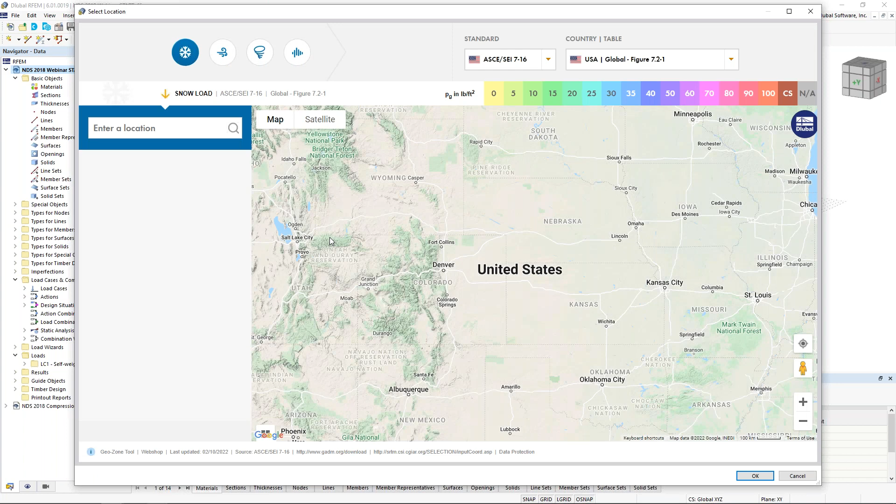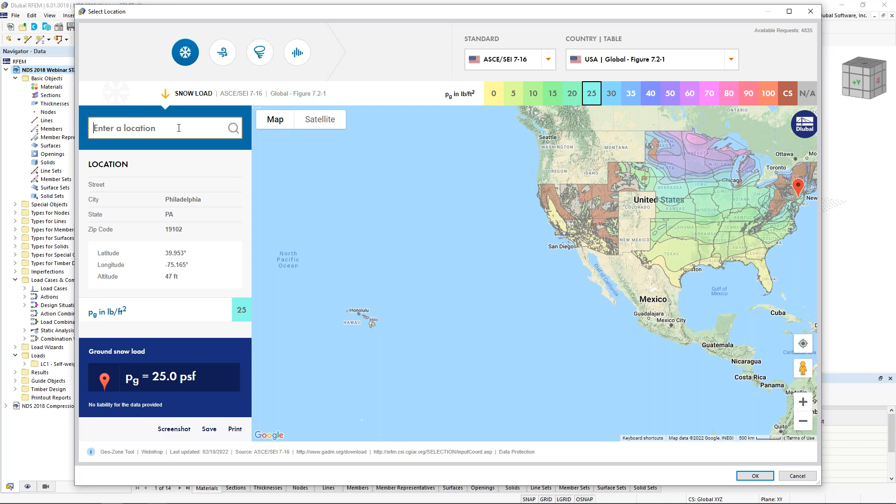Finally, under the model parameters, you can see that this links directly to our online GeoZone tool. And this GeoZone tool is available on our website where we have integrated the maps from the ASCE 7 for snow, wind, tornado, and seismic. This is linked with Google Maps technology, so we just need to type in our project location, for example, Philadelphia, and we can see the ground snow load is automatically populated here directly from the standard. When I click OK, all of this information is automatically going to be imported into the model that will be used for those load wizards a little bit later on.

So once we are done defining the base data, we will be brought into the main program, and we can see our drawing grid activated here. Well, we can modify those drawing grid settings by right-clicking at grid down at the bottom. My default spacing here is set at 1 foot. If we see anything other than this, for example, when you first start the model, you might see something like around 3 feet, you can always hit this default option here to go back to the 1 foot or adjust this to maybe 0.5 feet. We can also open up our units here and change this to inches if we're working on a much smaller scale.

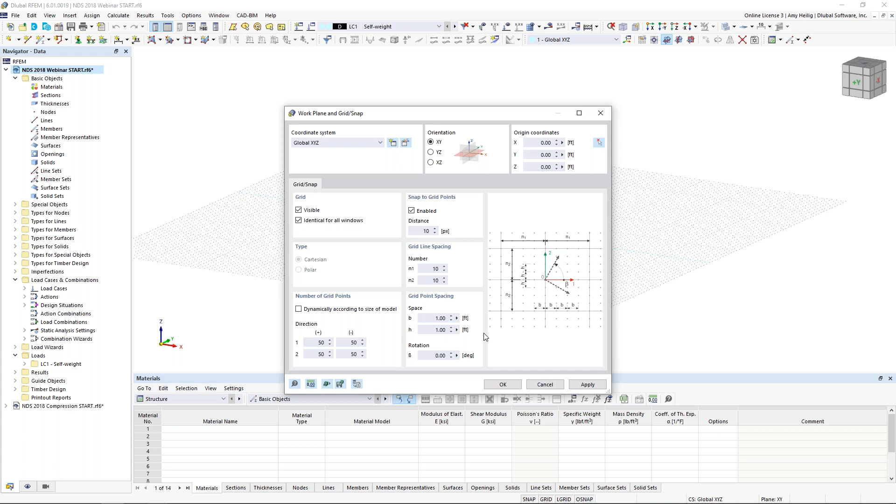So there are many different ways to model within the program. We could begin by drawing our first member and defining the cross sections and materials as we go. But an alternative option I'm going to take is to define all of my cross sections and materials at the beginning. So over in the navigator, I can right click on my sections and I can create a new section here.

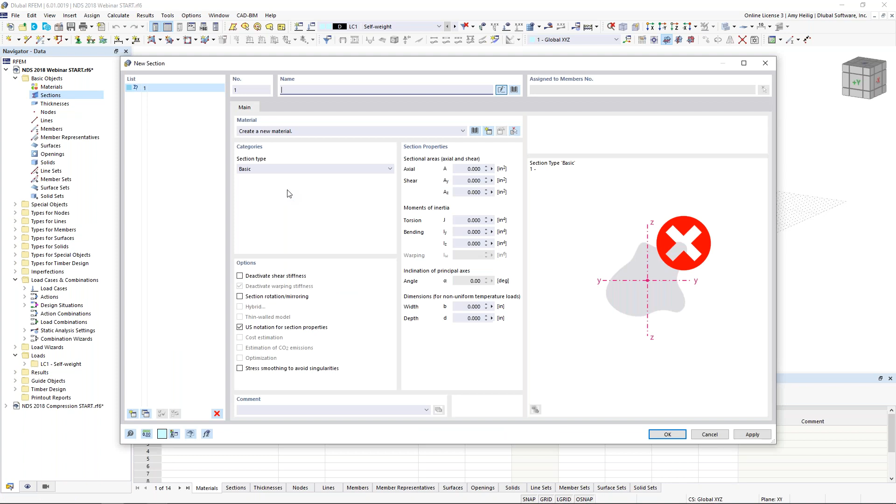I want to access my section library, and we have our standardized sections over on the left, which does include timber. So when we launch this, we can use our filters over on the left to filter the NDS 2018, and we see the various dimensional sections available to us, including glulam, for example, and we can see all of the available sizes.

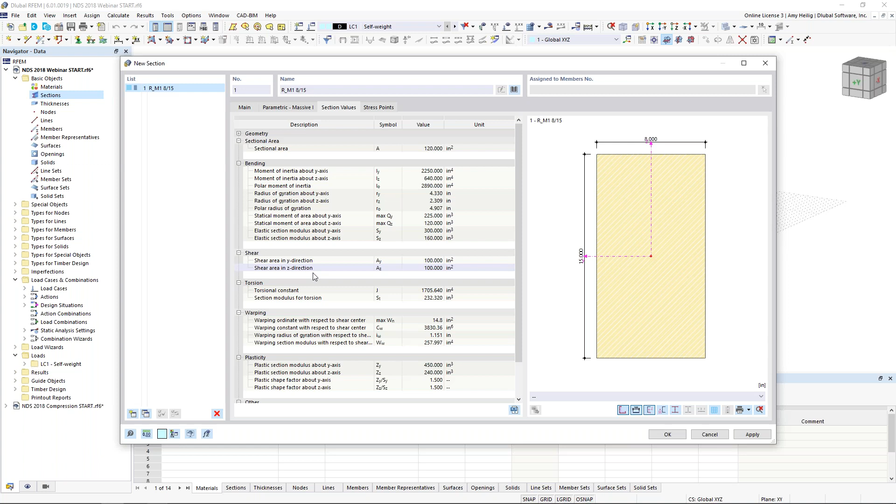Now, the alternative option is to go back into the library here and choose one of our parametric massive sections. So for example, we can just choose a rectangle. This allows me to input the dimensions directly, and we'll choose 8 inches in width and 15 inches in depth. The cross-section properties will be automatically calculated here. And back under that first tab is where we need to set our material for this cross-section.

So we'll visit our material database now, and we can use our filters over on the left here to filter to timber. We can filter to the NDS 2018, and sure enough, we have every single material available here from the NDS standard. Now we can take it a step further, and perhaps we want to filter to table 5A for our glulam materials. And I'm going to select 24F 1.7E. Over on the right-hand side, we can see the different options, and we'll choose Southern Pine.

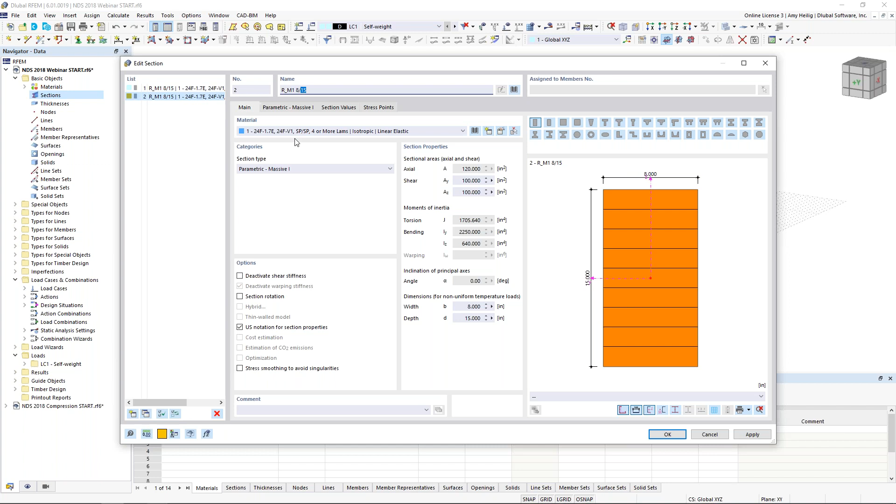I click OK, and now that material is available to me for all future sections that I will model in the program. I can simply make a copy of this existing cross-section, and rather than going into my library, I can simply type in the exact dimension here, 26. So we'll notice that this cross-section updates accordingly. Same material will be used. We want to create one more cross-section here.

This time, instead of a rectangle, we'll choose a parametric square section. Under the massive tab here, I will go ahead and adjust the dimensions to 6 inches. Under the main tab, I don't want to set glulam, but rather I'm going to go back into my material library and choose table 4D. Now we can see all of the available materials to us, which is still a little overwhelming, so we can take advantage of the search options down at the bottom.

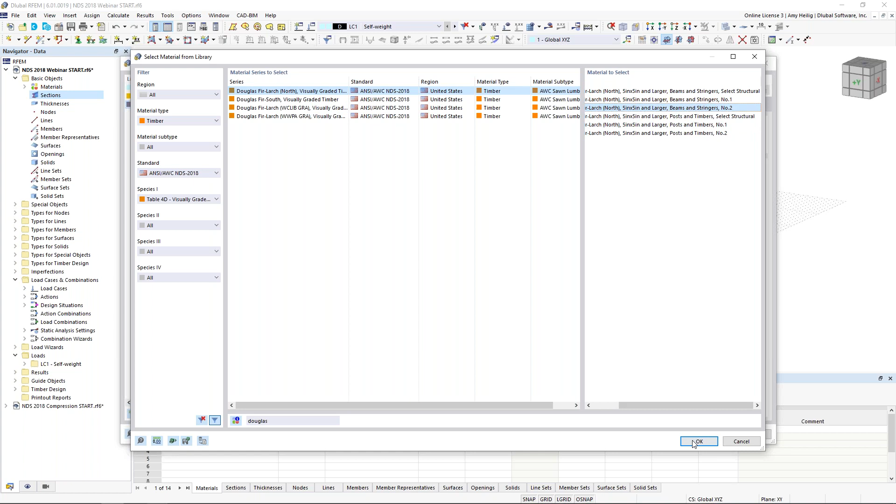So for example, if I begin to type Douglas, notice that all of the materials with Douglas within the name are now filtered. So I can choose Douglas Fir-Larch North, and then I can scroll over to select number 2. I click OK, so now we have that solid section given to us here. Once I click OK, what I'll notice is that my materials and cross sections are now available within my navigator here.

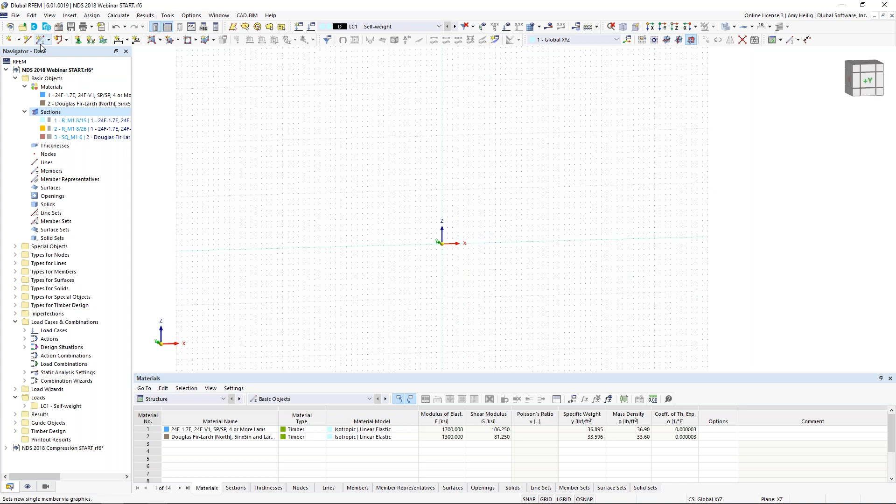So I want to begin by drawing my first member. I will adjust my drawing grid into the vertical XZ plane, and I will go up to my tool to draw a new single member. The member type is going to be beam. The design properties are activated here, and this is specific to the timber design add-on and relative to these additional tabs up at the top. So we'll leave this enabled, but I'm not going to get into the details right now specific for the design properties.

We'll go to the section tab here, and the distribution type is going to be set to linear. So this allows me to define a tapered glulam section. Now, new within RFEM 6 is that previously we only allowed you to define a tapered section that looked exactly like this, where the center line just runs right down the center. But we have added within RFEM 6 the ability to adjust the alignment. So now we can see that the taper only occurs at the bottom section of the member.

The member start will be that 8 by 15 section, but the member end will be the 8 by 26 that we've already defined. The material is automatically set here, so this is all we need to do to define our first member.

We click OK, and I can snap from the point 0, 0, 0 up to a point 15 feet in the vertical direction, and we have our first tapered member. Now, in a similar fashion, I can snap to a point here 23 feet in the X direction up to the top of the column.

If I right click to exit out of that dialog box, I see here that I would like to add in some type of pitch for my roof, and I'd like this pitch to be 14 degrees.

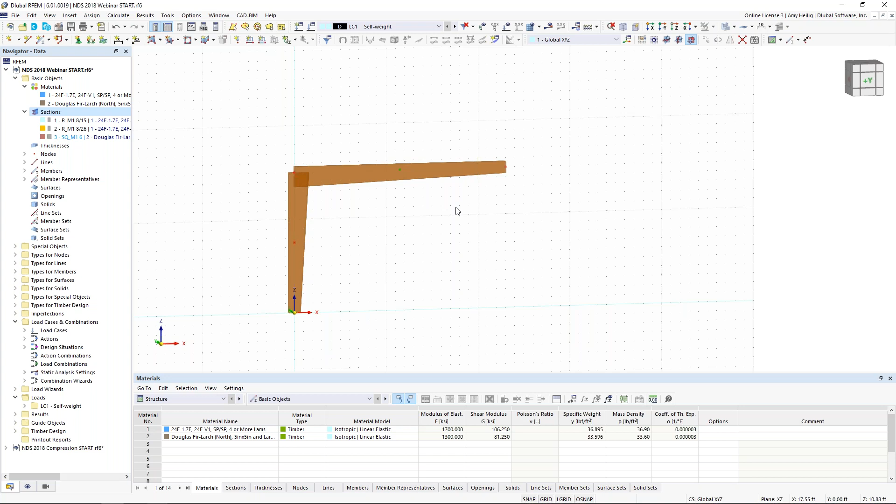So rather than manually having to figure out the geometry, we can select this member, and under the edit options, I can go down to chamfer. And I can input in an angle of -14 degrees. I would like to rotate about the global y-axis in the vertical z direction.

And then I need to graphically select my base point here. I click OK, and so now we'll have that 14-degree incline.

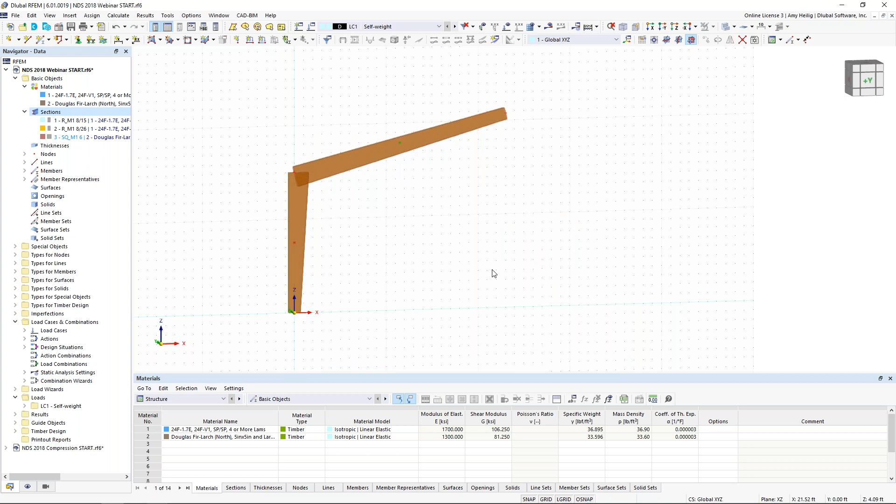I select both of these members, and I'm going to utilize my mirror tool. This is exactly like what we would see in something like AutoCAD, where I can create a copy. I would like to mirror about the ZY plane, and I'm going to choose my mirroring point right here at the apex. I click OK, and we should see our first frame generated.

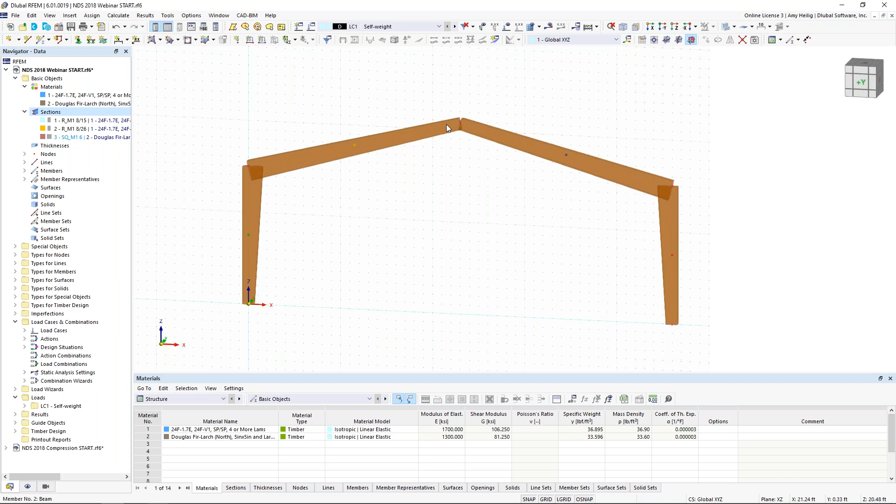Now, I want to add a member hinge at the top here only for my beam on the left. I can do so by double clicking on the member. Now, by default, everything is considered fully fixed, so in order to add in that member hinge, I can activate the hinges here.

And now we get a new tab, and at the member start, I can define my member hinge. You can see that the program automatically suggests I probably want to release the moment about the local Y and local Z axes. That's correct.

I click OK. So now that member hinge definition is available to me for any future members within this model. I don't need to keep redefining, I can simply select it from this drop-down box. I can click OK, and now we should see that member hinge applied to that beam on the left.

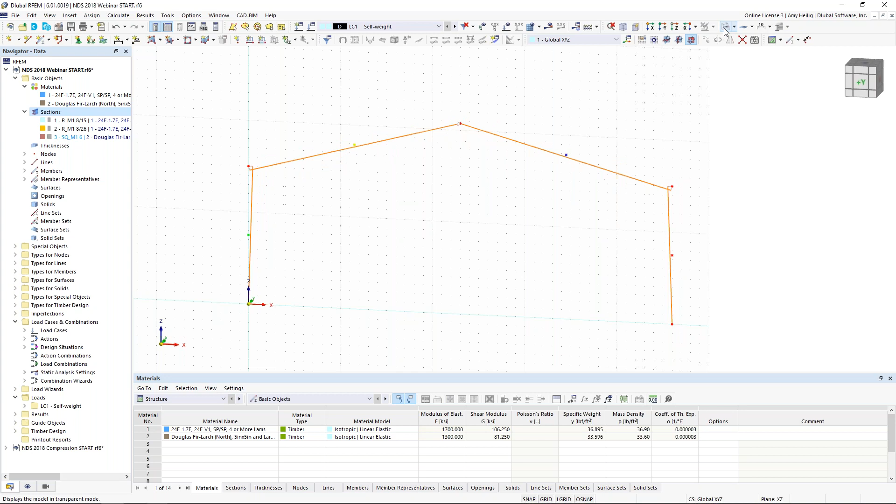So I'll turn this into wireframe view, and I'm going to turn off my member representatives in order to make this a little bit more clear for you. I'm going to hold down my control key to select both of these top members.

And I'm going to right click, and under members, I am going to divide the member by a set number of intermediate nodes. So I want to add 2 nodes along the member length here, but it's really important that I also check this option down at the bottom to create the on-member nodes without actually dividing the member. We want to keep these as one continuous segment and just rather have these nodes added along the length.

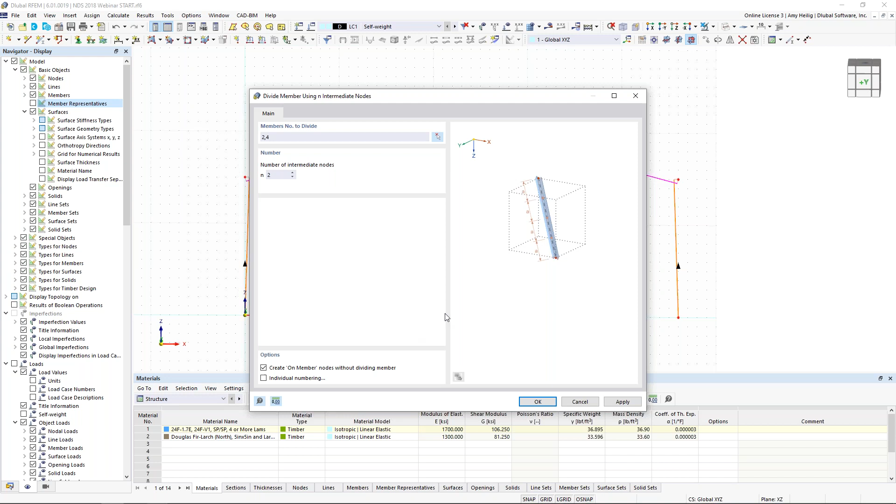So when I click OK, you'll notice that these nodes are added. They're a different color than my standard nodes. If I double click on it, the reason why is because it has this special setting here. The node type is set to on member rather than standard.

So now any other member that frames into this original member, maybe we add in some nodes at these, or add in some loads at these specific nodal points, will all be detected along the member length.

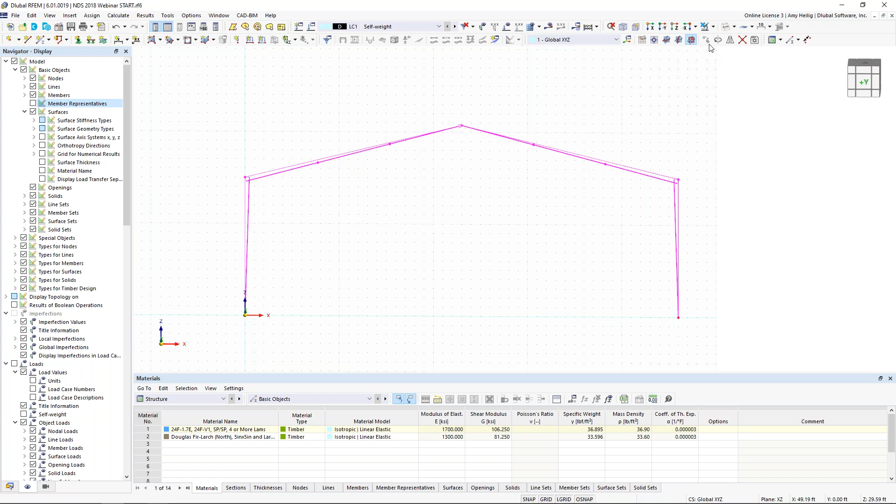I'm going to take my selection box and drag from right to left. And notice I am not going to select the nodes at the bottom of the structure, and there is a reason for this. We will select all of these options except for those nodes and utilize our Move Copy tool.

Move Copy tool allows me to create a copy, and I'll create 4 copies in the Y direction of 16 feet. But under my second tab, I have this option to activate these step links.

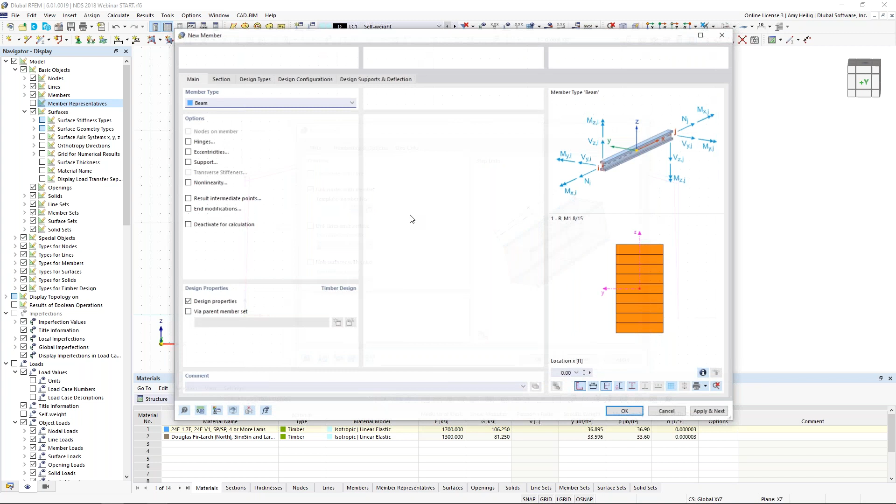So when I activate this, I get a new tab, and the program allows me to create new members between my copied nodes. So I can create a new template, and this should look like a familiar dialog box. It's as though we're drawing a new member. The member type is going to be set to truss.

So truss is a little different, and you'll notice that the hinges is now grayed out. That's because internally we're going to assume that we have a moment release at the member start and the member end. So rather than having to manually define that, we can select truss, and that's automatically applied.

Now for my cross section, I want to use my drop-down box here to select that 6x6 solid Douglas fir-larch section. I click OK. Remember, I'm still within the Move Copy dialog box. I click OK. And again, the advantage is that the program has automatically generated those members between those copied nodes.

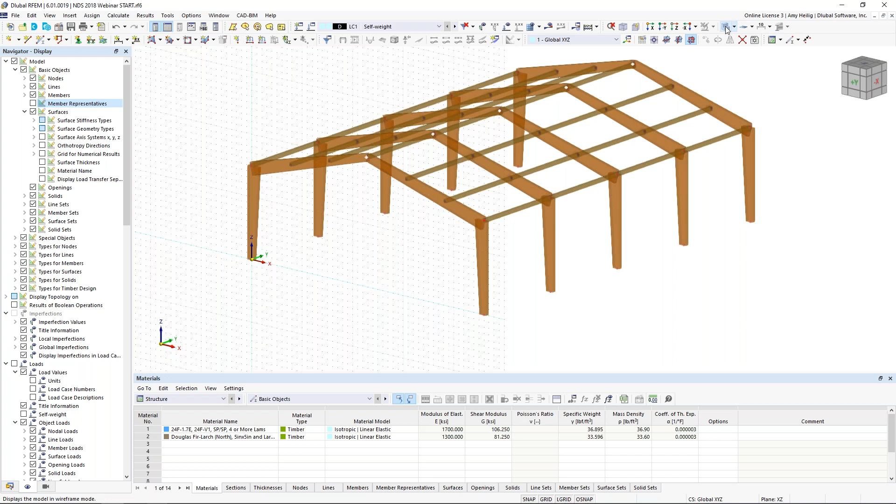Okay, so what we would like to do now is to add some columns at the front and rear of our structure. What I'll do is turn this back to wireframe view, and I'm going to adjust my drawing grid origin with this button up here in my toolbar.

And I want to snap that directly to this point along my member length. So we can see when we rotate this around, the drawing grid's still at the front of the structure, but I've just modified the location.

We're going to draw a new member. The member type is beam. I do want to activate the hinges here. At the section tab, I will leave this as the 8x15 section, but not tapered, just one continuous section throughout the length.

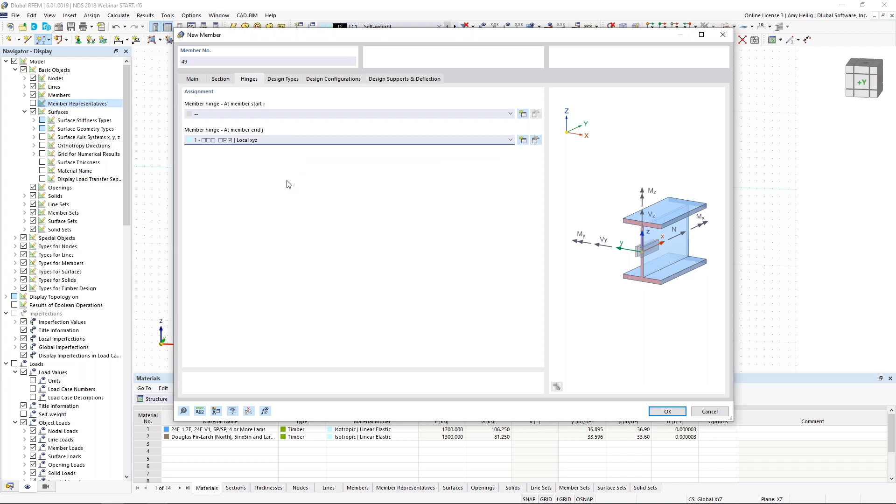For the hinges, I would like the member hinge to be applied to the member end. Remember, I've already defined that member hinge. I can select it from my drop-down box. I click OK, and I'm just going to snap here from a point at the bottom of my structure up to the top, the intersecting node.

Now, this node needs to be slightly adjusted at the bottom. Rather than sitting at negative 0.33, I want it to sit at 0 elevation. I just adjust that, I hit enter, and now that column is exactly where it should be.

I can highlight this element, hold down my control key, and utilize the drag and drop feature to make a copy here on the right side of the structure.

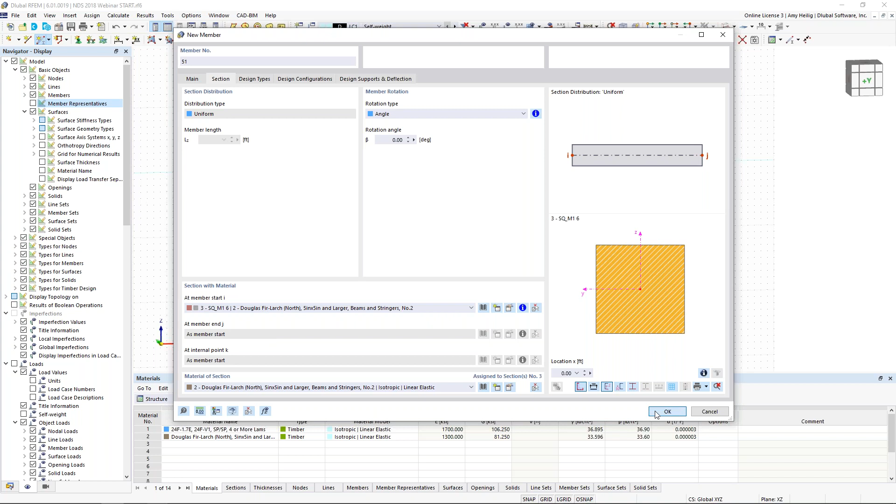I would like to add in some additional lateral bracing here in the global X direction. So we go to draw a new member. Once again, the member type will be set to truss. The section is going to be that 6x6 solid section here. Remember, I don't need to apply any hinges because internally the truss option is taking care of that. And I'm just going to snap from the bottom of my column elements up here to the top.

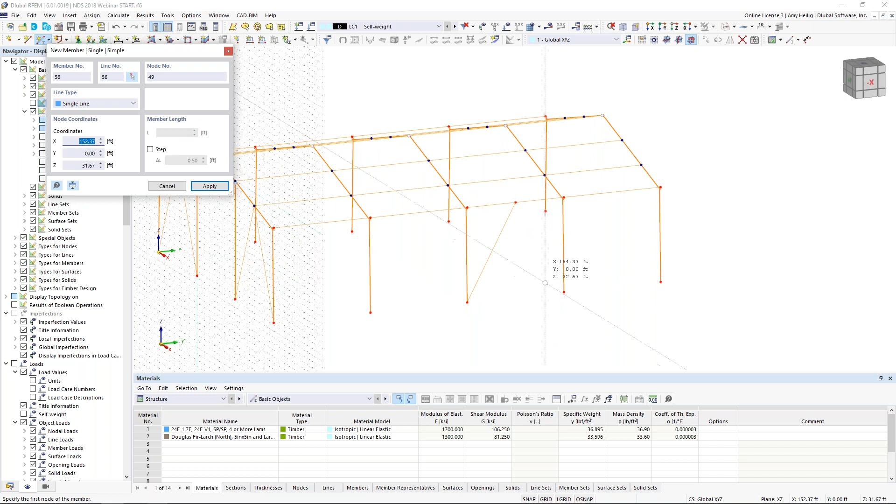I can rotate this around. Notice the program automatically snaps to these nodal points. While I'm still within this dialog box, I want to add in additional lateral bracing here in the global Y direction. So I will snap from the bottom of the column. Notice the program detects the midpoint here of that truss segment.

And I'll do so up here on the roof by just selecting my start and end node points. And we'll do it one more time here. I right-click to exit out of this dialog box, zoom in just to make sure everything's connected, everything looks fine.

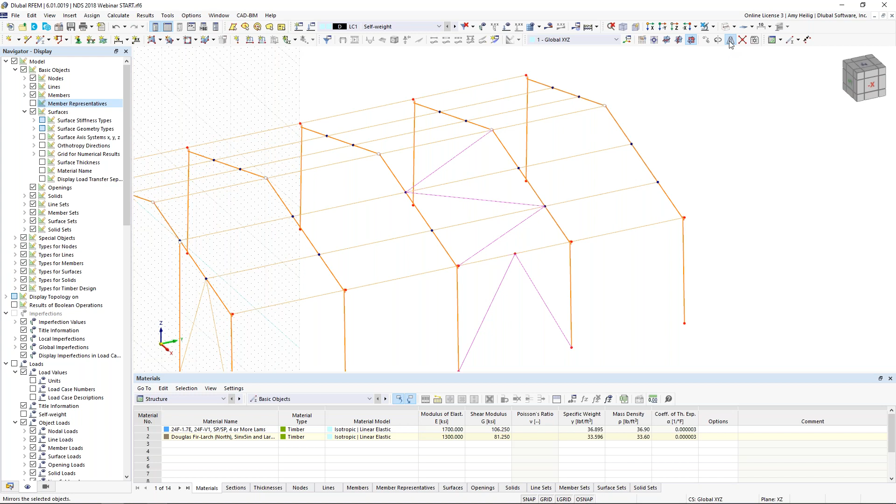Now I'm going to hold down my control key to select these additional brace elements that I just created. We'll utilize our mirror tool once again to create a copy about the YZ plane, and I'm going to select my mirroring point at the top here of my structure. I click OK, and now we have the bracing on the other side.

I would like to take these elements at the front of the structure. I will use my selection box to highlight them all. I hold down my control key, I drag and drop to make a copy at the rear of the structure. So now those column elements and braces are shown at the rear of the structure with that simple tool.

Okay, the member modeling is now complete. What I would like to do is to support the structure with a new nodal support, and we can find that up here in our toolbar, assign new nodal support.

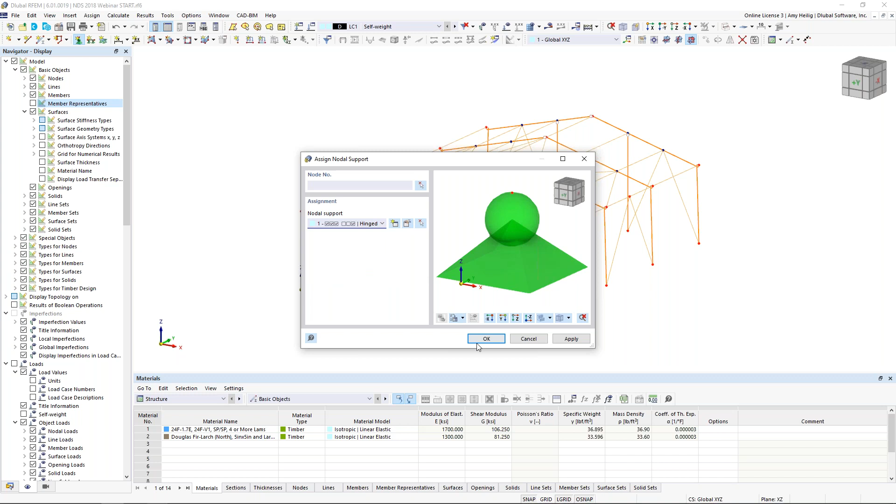Now we have some default options here within the dropdown, including a typical hinged, we have fixed, or we have a few roller options. Of course, you can always create your own nodal support option with the 6 degrees of freedom. Non-linearities are available in there as well, but for today, we're just going to choose the default hinged. I click OK, and this will allow me to highlight over all the nodes at the bottom of my structure.

If I right-click to exit out of that dialog box and right-click on any one of these nodal supports, I can use my slider option to increase or decrease the size. So that's also new within RFEM 6.

So our member modeling is complete. We've added the supports. I'd like to move on to loading now, but there's one thing I want to take care of related to modeling that does affect our loading.

This will be a structure with some type of roof membrane, but I don't want to actually draw in the roof surface with a material and thickness. Rather, I'm going to take advantage of a new feature within the program for load transfer only. I'm going to draw a new surface, and the surface is not going to affect the stiffness. It does not add any rigidity to the structure. We're not applying a material. We're purely using it for load transfer to our members.

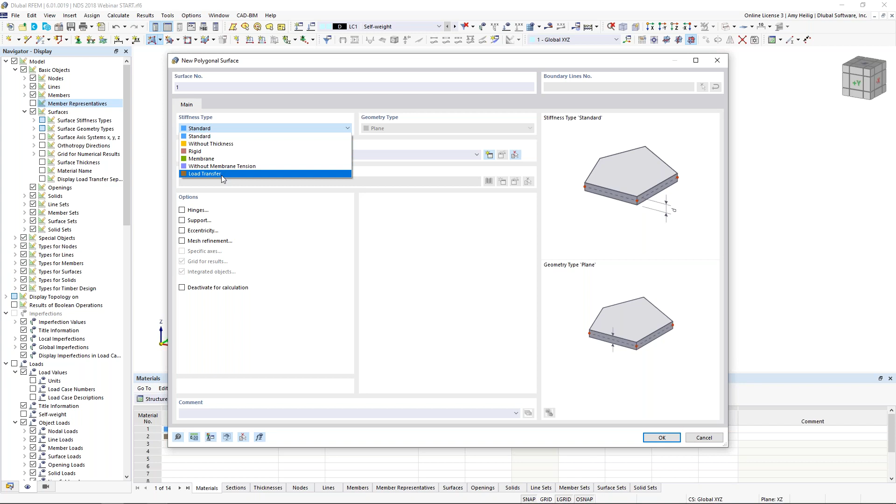Within our toolbar, we can draw a new surface, and I'll choose the option polygon. Rather than the stiffness type set to standard, where I would define a material and thickness, we're going to use our dropdown to select this new option, load transfer. Everything is grayed out here. Again, we're not adding stiffness, but rather we go to this second tab and tell the program in which direction we want to transfer the load.

Based on one-way load distribution of the x-axis—these are local x-axes of the surfaces, local y-axes—or do I want two-way load distribution in both directions? We'll go ahead and stick with only the x direction.

When I click OK, this allows me to snap to my different points to draw in this load transfer surface on the left side. We can see that dotted line shown in wireframe view. We'll do so on the right-hand side, and we'll close this loop by selecting our original point, and here are those two surfaces generated.

I can right-click to show the local axis system of those surfaces, and we can make sure the local x-axis direction for the load distribution is in the correct orientation. I'll turn back off the local axes. We can even turn this into rendered view if we'd like to see those surfaces in a bit more detail.

Now that these surfaces are drawn, our modeling is complete and we can truly move on to the loading.

In order to apply the loading to the structure, we need to set up our load cases. I'll go up to my toolbar to select Edit Active Load Case. The program by default creates my first load case, called self-weight. I can rename this to dead load. Notice the self-weight is active here. The action categories are based on ASCE 7; we have selected dead load from this dropdown.

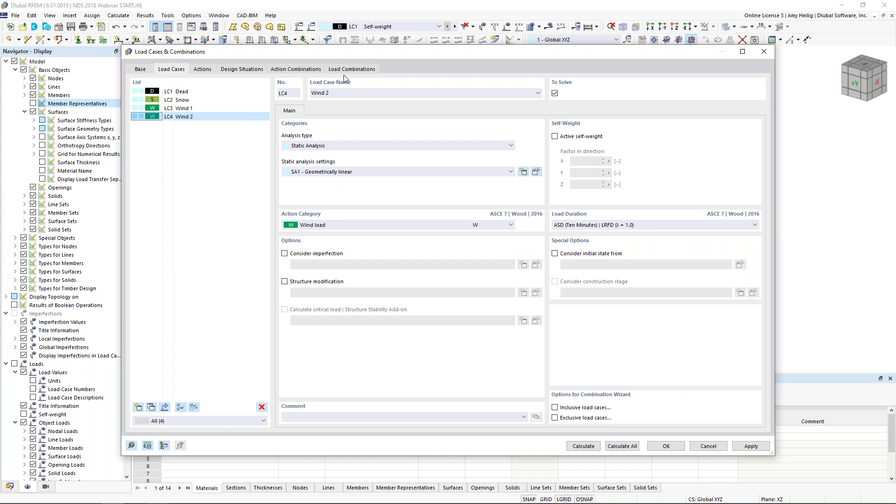I'm going to create a second load case called snow load with the action category of snow. Self-weight is unchecked here—we don't want to account for it twice. I'm going to create a third load case, wind 1, with the action category of wind load. I can even make a copy of this existing wind load case and rename it to wind load 2. Now I'll get back into this dialog box to explain further about design situations and load combinations, but for now I just wanted to set up these load cases.

Now that those are set up, I can apply the loads to the structure in the relevant load case. We'll begin with dead load. The advantage of these new surface load transfer options is that I can apply a surface load to this structure, which is much more efficient than applying individual member loads to each of my frames. I'll go up here to draw a new surface load. The load magnitude is set at negative 0.01 kips per square foot. I can graphically select surface number 1 and surface number 2. I click OK, and here are my loads shown graphically on the structure.

Under the display settings in my navigator, we'll see at the very top our surfaces tree. When I expand the surfaces, we have this setting to display the load transfer separately.

So I can activate this, and now we can see the loads applied to each member based on the tributary area. So just a bit of a time saver here by utilizing these surface loads.

Now for our snow load, we want to take advantage of our load wizard. If you remember, we set that up within the base data at the beginning of the presentation. So going back to my navigator, under my data tab, I'll scroll down and see my load wizards tree. We have available the snow loads, so I'll double click on this, and what this allows me to do is automatically generate the snow loads according to the ASCE 7.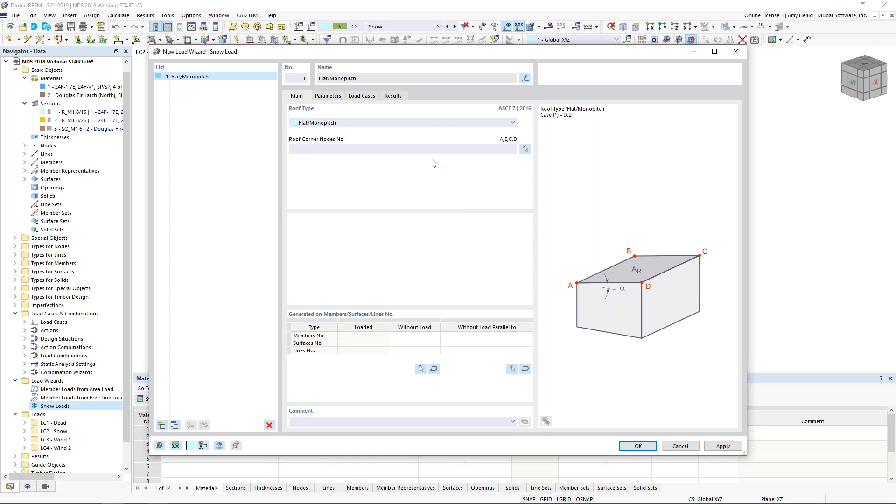So we want to choose the roof type for a dual pitch type of structure. I just want to let you know that this load generator is only applicable for rectangular type structures. If you have anything outside of this geometry, you won't be able to use this automatic load wizard, so just keep that in mind.

For today, we do fit into this geometry, so we want to graphically select here the nodes that make up the roof. We will select the 6 exterior nodes, clicking one by one. Once I finish that, the program automatically detects what the roof geometry is.

Under the parameters tab, the program has already input my ground snow load. We have connected that to the GeoZone tool directly from our website. It inputs the 25 PSF ground snow load directly from the ASCE 7 maps. Now, of course, you can manually enter in this information as well.

Now, the snow load parameters, maybe you'd want to adjust these, such as the terrain category, roof exposure, risk category. We can use our drop-down box for any one of these options.

Under the load cases, we have the ability here to create both the balanced and unbalanced load cases. Now, I'm not going to create the unbalanced for today, so I'll just uncheck them, but we will create the simple load case for balance. The program recognizes we probably want to use load case 2 here that was already set to the snow load designation, so it's populated that.

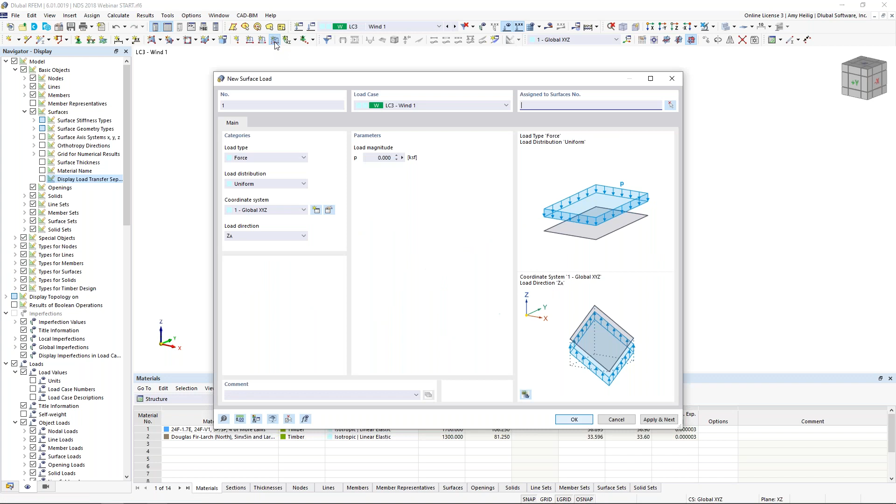Well, for load case 3 here, we will begin with a new surface load. The difference here is that I want to change this based on the local X, Y, and Z coordinates of the surface itself. So we'll leave this according to the local Z direction.

I want to modify the magnitude to 0.025 kips per square foot. I select graphically surface number 1. I click OK, and then I'll hit apply and next. What this allows me to do is to remain within this dialog box, but we can see the upward wind load applied in the background here to surface number 1.

Well, now I can just simply adjust the magnitude to 0.015 kips per square foot. I can graphically select surface number 2. I hit apply and next, and now we see that additional surface load applied on the second surface.

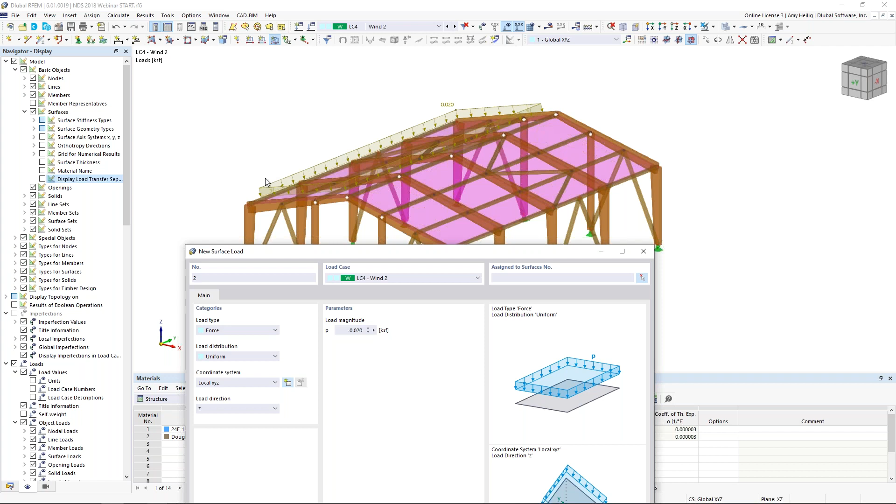Well, now I can simply switch to load case number 4, while again, still within this dialog box, I adjust my magnitude to negative 0.02 kips per square foot. I can type in surface number 1, I don't necessarily have to graphically select it. I hit apply and next, and we see that downward pressure applied to surface number 1 under load case 4.

I'm going to adjust my magnitude for the last time here to negative 0.01 kips per square foot.

I apply to surface number 2, and I click OK. So now all of our loads have been applied to the structure. So let us go back into the load cases and combinations dialog box here. Back under the base tab, remember we have activated the load combinations to automatically be generated according to the ASCE 7. The program does require us to choose the wood option because we have activated the timber design add-on.

And the entire reason for this is the feature of creep. So let us jump back to the PowerPoint to discuss this in a bit more detail. This entire topic is new within RFEM 6, and we want to refer to the NDS 2018 section 3.5.2 for long-term loading. Within the code, and this section in particular, it talks about the time-dependent deformation or the creep factor K sub CR. And this factor should be applied to the long-term deflection, but not the short-term, in order to be considered for the total deflection according to equation 3.5-1, and we can see that written here.

So when we automatically generate these load combinations according to the ASCE 7, in particular wood, we are going to create a third design situation. Design situations will make a little bit more sense in just a minute, but I want this to be clear that we are actually going to reference the IBC 2018, and in particular section 1604.3, in order to generate the serviceability load combinations directly from the IBC for our serviceability checks when we run the timber design. And within these load combinations designated within this design situation, one of them will include this creep factor multiplied by our dead load. That's in order to consider creep.

So a new feature here, previously we were not able to consider this creep factor. You'll notice within the drop-down box, if we do not want to consider creep at all, we can just set this to 1.0. But otherwise we would choose the 1.5 or 2 factors here. This comes directly from the NDS standard. I always like to activate this option here, combination names according to the action category. And we will jump to the design situations.

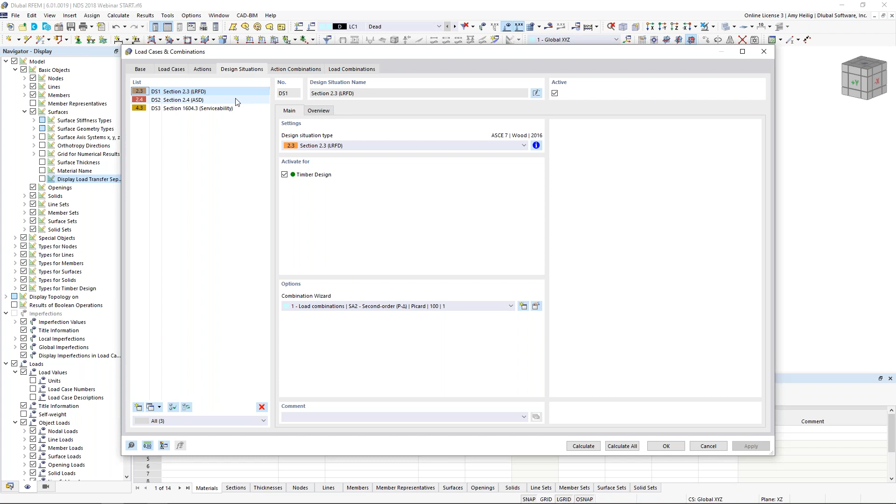So we have 3 design situations generated, 2 directly from the ASCE 7: LRFD, which is our factored load combinations, and ASD, which is our unfactored load combinations. And again, this is new within the ASCE 7 Wood, we are going to create this 3rd design situation here for serviceability. If we click this info button, we can see directly the load cases that will be considered for the generation of the load combinations. And here is that creep factor times our dead load. All of these are active for our timber design add-on.

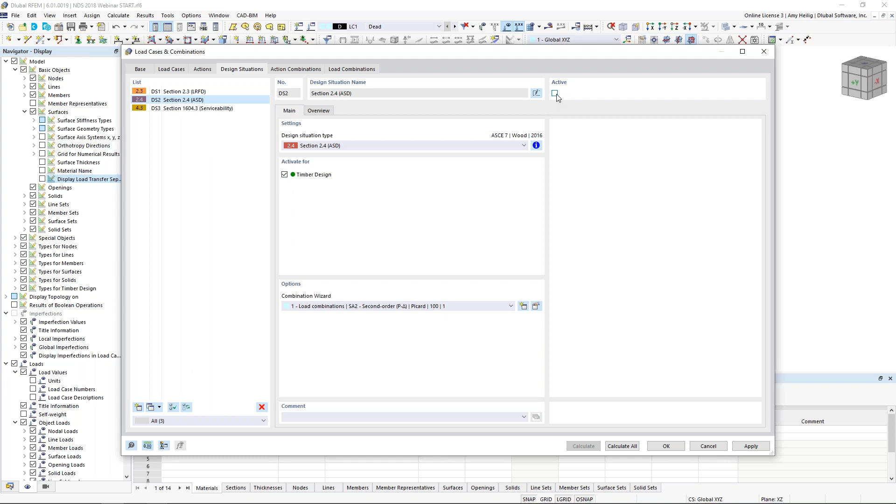Now for today, I am going to be doing my design according to LRFD, not ASD. Therefore, I don't need the ASD load combination, so I can just simply deactivate that here. It will just decrease the number of load combinations, which we can see here under our last tab. Here are my factored LRFD load combinations for my first design situation, and my 3rd design situation are my IBC load combinations. And here we see the 1.5, and we can toggle here to the assignment, the 1.5 creep factor multiplied by our dead load.

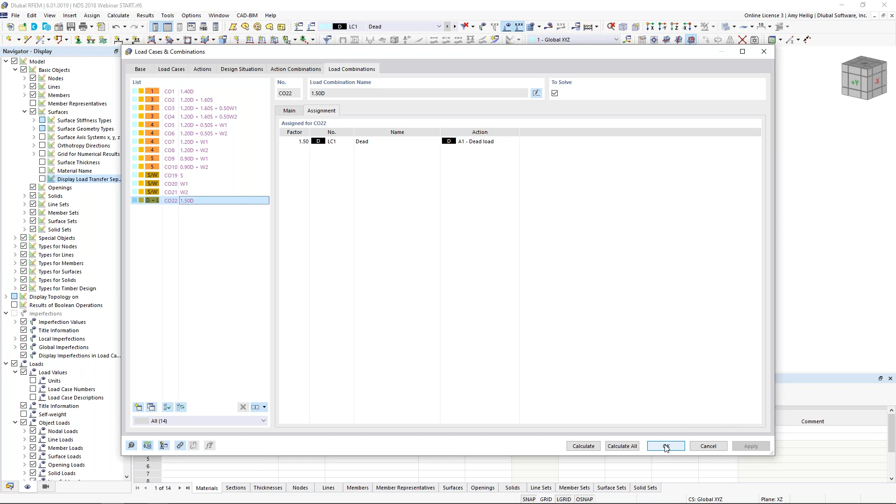Okay, so now that these load combinations are set up, what we can do within our drop-down box is see all of the available load combinations we were just looking at. We can view all of the loads applied to the structure, including the relevant load factors according to the ASCE 7 and the IBC. So technically we are ready to run the analysis portion, but again, the huge advantage of RFEM 6 is that these add-ons have all been integrated within the main program. So we want to do the analysis and design workflow together.

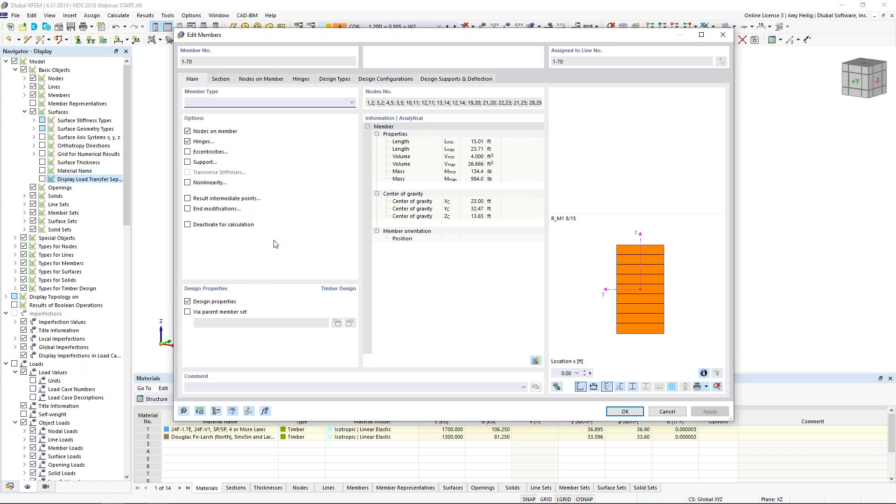So what I'm going to do is move into the design properties for all of these members. If I highlight all of my members and take a look at the edit member detail settings within my dialog box, you can see I have members 1 through 70 selected. And we have our design properties turned on here, which activates these various settings for design types, design configurations, and so on. Now, rather than individually setting this information, I want to take advantage of our member representatives. So I will go back into my navigator display settings. I'll turn off my surfaces here.

Let me turn on the member representatives and wireframe view. So you'll notice we have a lot of color coding going on here. Again, we have activated that within the base data, so the program has grouped together similar members with cross sections, materials, and so on. Now, I want to take these 4 members at the end, and I'm holding down my control key to select them.

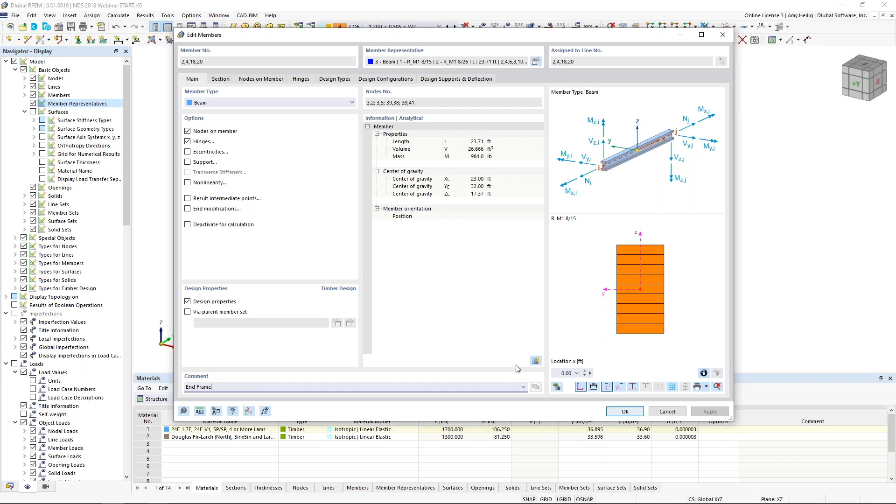I am going to double click to edit, and I'm going to add a comment down here, such as end frame. Remember, I also activated the option at the beginning of the presentation so that member representatives will detect different comments. So now these 4 members are in a different member representative group than the interior members. Back under my navigator display, I can also see the color coding, and we can scroll through the different member design or member representative options here.

Okay, so what is the advantage of these? Well, when I double click any one of these colored dots, so for example, we'll start off with member representative number 4, it will bring me into the member representative dialog box, and you'll notice we have these exact same tabs that we saw for each individual member.

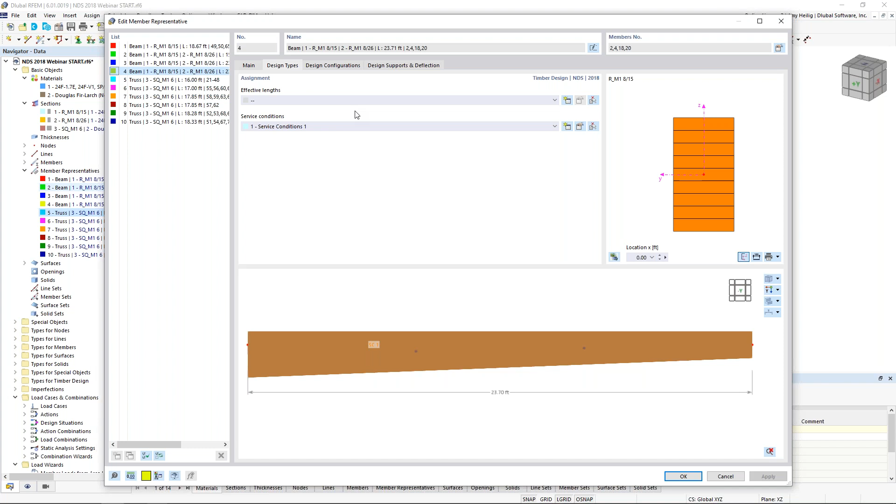So what I can do now is to input the design information for a group of members that I know are all going to have the same unbraced lengths, for example, the same service conditions, whatever it may be. That way I can go into the member representatives, make a change, and it will affect all of those group members rather than individually applying to each member. So let us begin here with these initial tapered members. Remember, this includes the 4 exterior girders here.

Now we want to start off with the effective length. So I'll create a new effective length here. And this is my input information for stability design. So we're talking about flexural buckling about the strong axis, the weak axis, and lateral torsional buckling. Now we want to set the information here on the second tab.

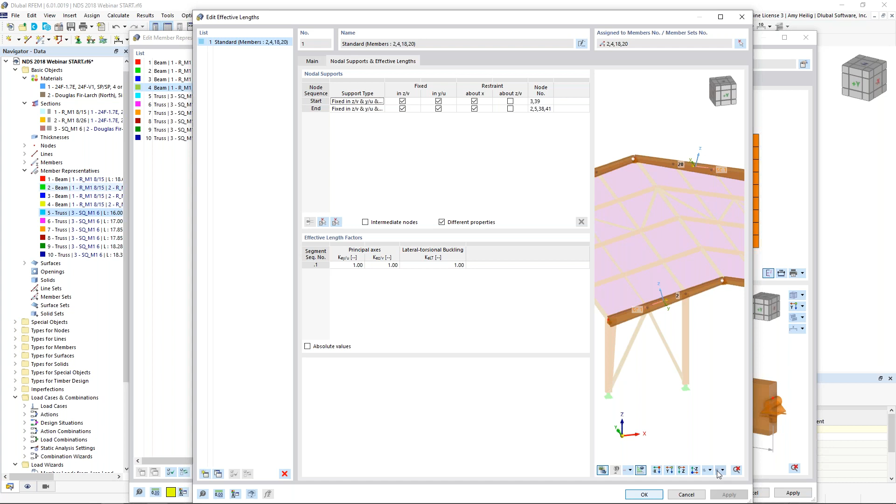But before I do, when I initially create a new effective length, notice over on the right-hand side, my members aren't populated. Well, if I initially create this definition, I click OK, and I go back into edit the same effective lengths, notice now the program says, okay, we're going to assign this to members 2, 4, 18, and 20. Why do I want to do that? Because now my picture in the lower right-hand corner will populate here. So I can see exactly which members I'm looking at in order to apply my intermediate restraints. So let me turn this to wireframe view.

Now, this all has to do with K-factors, with unbraced lengths, incredibly important for design, and we have two options here. Number one is we could work with the table down here at the bottom. Perhaps we want to toggle this to absolute values, and I could just directly input here K times L for my strong axis buckling, weak axis buckling, lateral torsional buckling. Now, alternatively, I can take advantage of inputting these intermediate supports graphically so that the program can calculate the K times L or the effective lengths automatically for me.

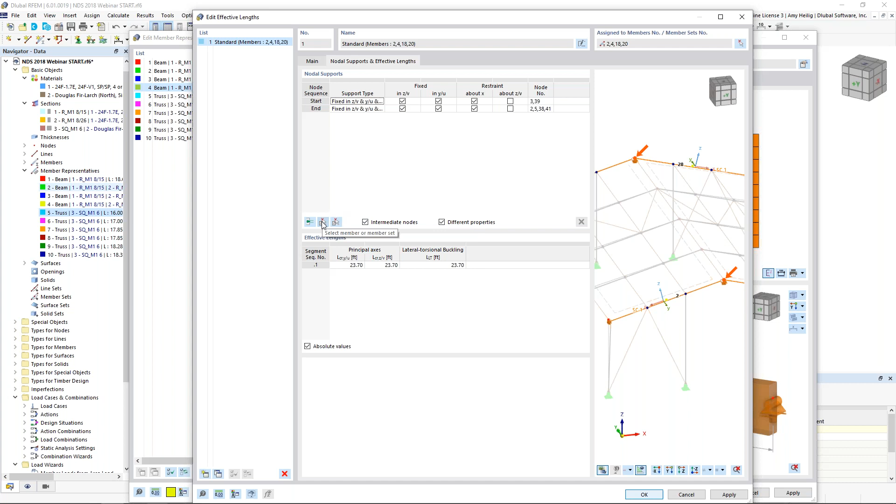What I want to do is to have the program detect the intermediate nodes along the member length. So I'm going to activate this option here, intermediate nodes, and then I'm going to use this option to select the member. I can select any one of these 4 members here. I'll just choose any one of them. And now notice the program has detected these 4 nodes along the member length. So we'll begin right here at the apex.

Well, notice we only have a truss member framing in the weak axis direction. So I probably want to add this intermediate restraint here to only restrain my tapered element in the weak axis or local Y direction. For node number 2, we have a column framing up. So I'm going to assume that this element is restrained in the vertical Z direction, as well as in the weak axis direction from my truss, as well as rotation against torsion at this location.

For my third node here, I'm going to assume these braces really have not much impact, so I'm only going to restrain the member in the weak axis direction. And finally, for my fourth node, we're going to leave this as default in the local Z, local Y, and about the local X axes. So now these 3 segments are updated here to consider my true unbraced length.

So this is how we can automatically consider that within the program by setting these intermediate restraints. So when I click OK, we can see here in wireframe view these intermediate restraints applied internally within the member. They're not true supports like nodal supports that we initially applied at the bottoms of our columns. They're just purely used for the design.

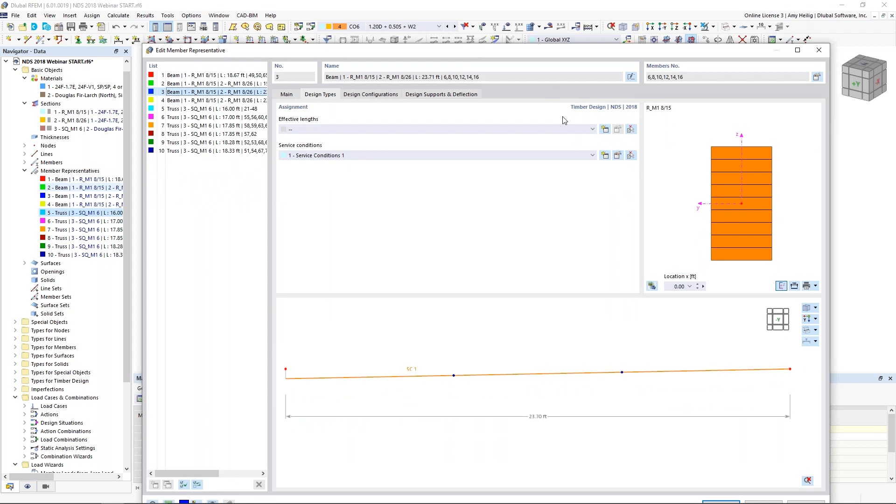Now, we want to jump to our member representatives here, which include my 6 interior frame elements. We have a little bit of a different scenario here. So I'm going to create a new effective length. And once again, I'm going to define this effective length. I'm going to click OK and go right back in there to edit it. The reason why is because now under the second tab, I can toggle to my picture and I see my 6 members updated here within my graphical view.

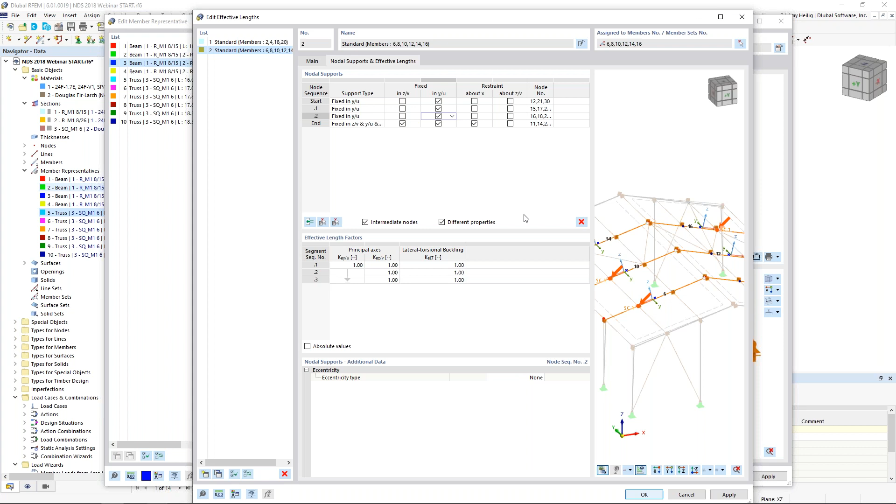I want to detect those intermediate nodes. I will graphically select any one of those 6 elements. I see my 4 nodes detected here. Up at the apex, I want to restrain it in the weak axis direction only. At my second node, it is also the weak axis direction only. My third node, weak axis direction only. We have no columns framing up at the center beams here. But finally, at my fourth node, we do have a column.

I'm going to assume that the program is going to restrain this in the vertical Z direction, the local Y direction, and about torsion. So we can toggle to our absolute values to see everything updated accordingly. Okay, so now that we have defined these for those 6 interior members, we can see the program update here automatically to show what's going to be used for design.

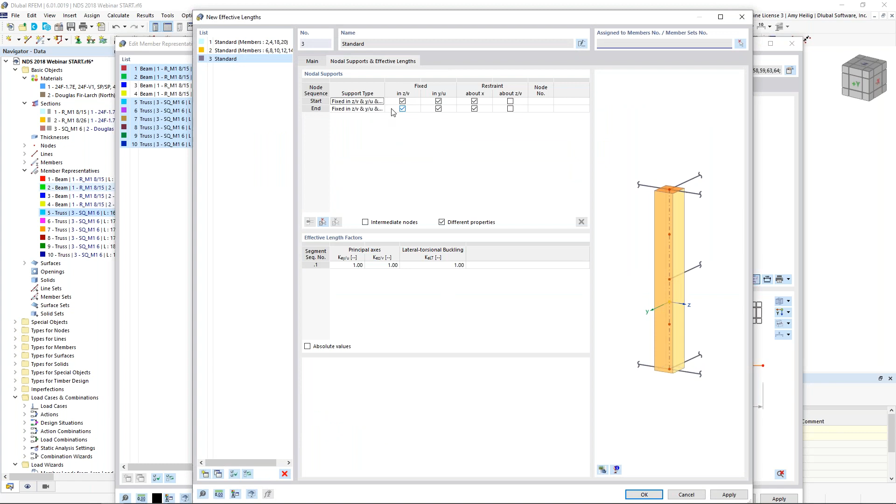So let us talk about the remainder of all of these member representatives. I'm holding down my control key to select all of them. It is all the remaining braces, the columns, and for this, we need to define a third effective length, and this one is much easier. All that we need to do here is leave this as default. These members are supported at the member start and the member end according to these default options here. No intermediate nodes detected. I click OK. We can see the program update graphically here within our view.

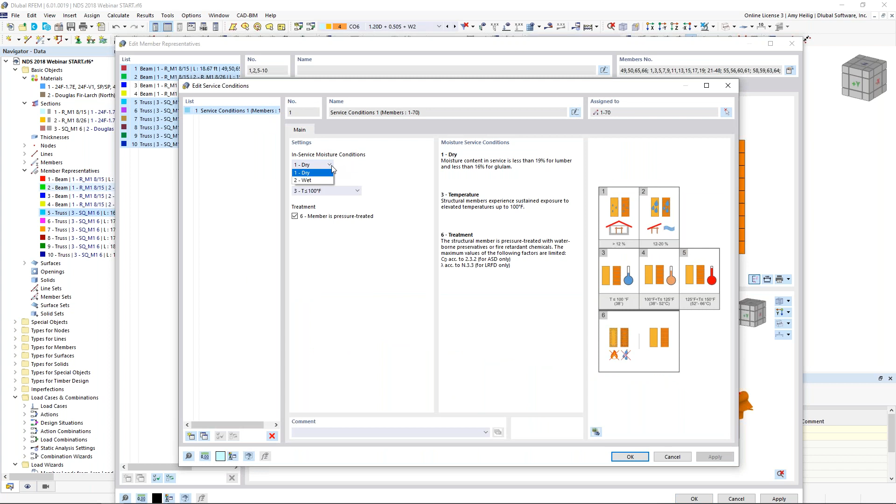Now, for the rest of these settings, the service conditions, if we go into the detail settings for these: are the members wet? Are they dry? What is the temperature? Is it pressure treated? We know that this is all going to affect the adjustment factors for the NDS design.

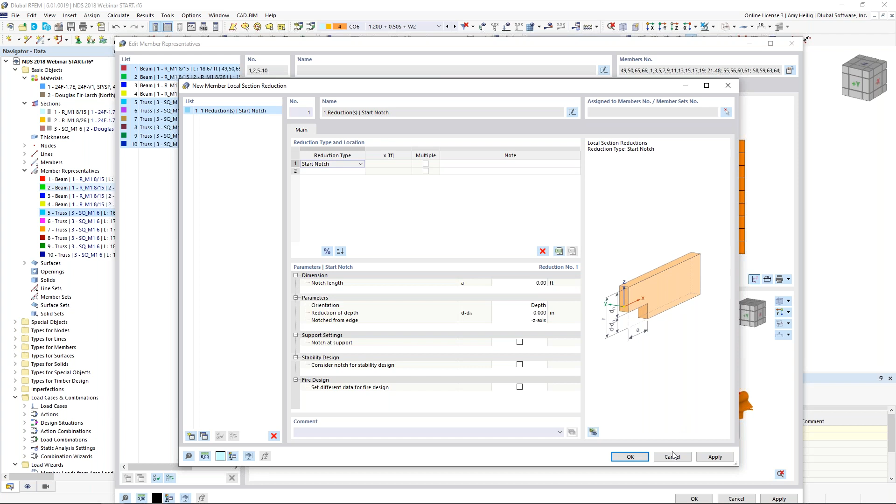The local section reductions, we can create notches in our members. So perhaps we have a notch at the member start or the member end, or internally, we can define that here with these section reductions. Now, this is only available for standard members. You wouldn't see this option for our tapered members if we went back to one of these other member representatives.

The design configuration. So we have here strength, serviceability, and fire. So let us begin with the strength configuration. We'll go into the settings here. So just some various settings that will go into the strength design according specifically to the NDS. So for example, torsion. If we're not really wanting to design these members for torsion, the NDS is a little bit vague on torsion design, and I really just want to skip this.

Well, what I can do is to set a higher ratio here, such as 0.3. So as long as my stresses for torsion are below a 0.3 ratio of the limiting torsion capacity, then we'll completely skip this check. So that's a little trick you can do here within these settings. Now we have some additional settings, including topics like the size factors, the flat use factors, and so on.

Under the Stability tab, this is a new feature within RFEM 6 specific to the NDS. It is the representative dimension for tapered compression members. I'll go back to the PowerPoint to explain this in more detail. So again, a new feature here that we've added within RFEM 6. We're going to reference the NDS 2018 section

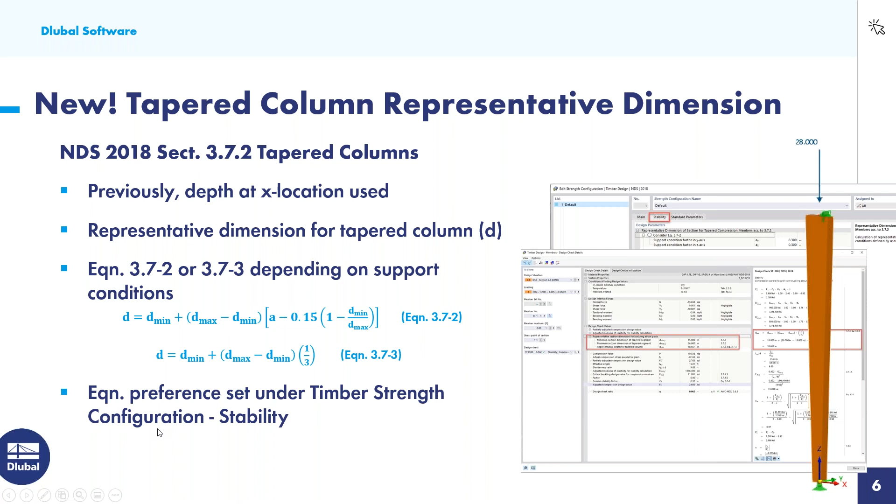But the equation preference can be set under the timber strength configuration and under that stability tab, which is exactly what we're looking at here. So I go back to the model and we can just go ahead and choose either equation. I'll stick with equation 3.7-3. Once we run our results, I'll show you exactly what this looks like and how we can now consider this according to the NDS provisions.

These standard parameters, these are just going to be all of those various factors that go into play for the NDS design. We have all the default options set here, but you can go in and adjust these as well. So once we have reviewed the strength configurations, we want to take a look at our serviceability configurations. And this is quite a bit more simple. We have here our limiting deflection ratios for simply supported L/360 and cantilevers at L/180, and you can adjust those as you see fit.

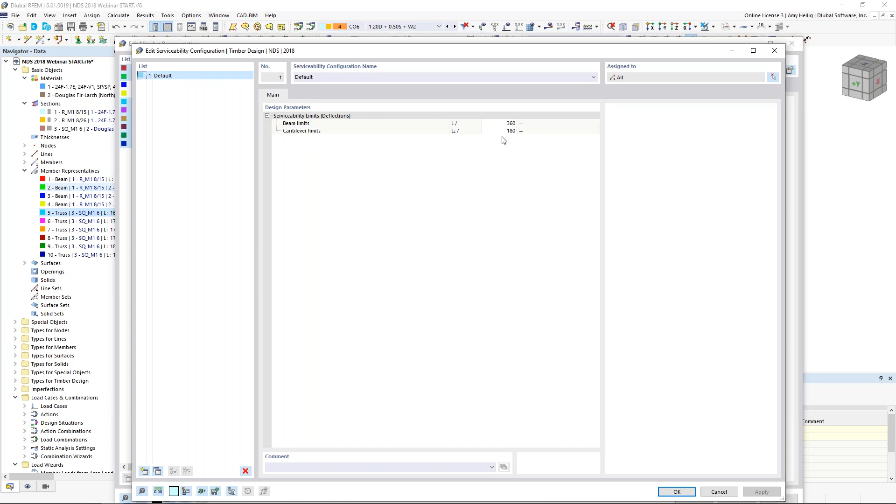Fire resistance design, we won't be doing that today, but that is a possibility to also calculate according to the NDS standard. I'll just go ahead and clear out this setting for now, that's fine. The design supports and deflection. So by default, the program is automatically going to consider every member as simply supported. So it's going to refer back to that L/360 design ratio.

Now, if you have a cantilever, you will need to define a design support, the member start or member end. I am actually going to breeze through this tab here because our second quick example at the end of the presentation today will go much more into detail for this. So for now, we just want to keep everything as default. Okay, so once all of these settings have been defined, we are now ready to run our analysis, but also the design of the structure.

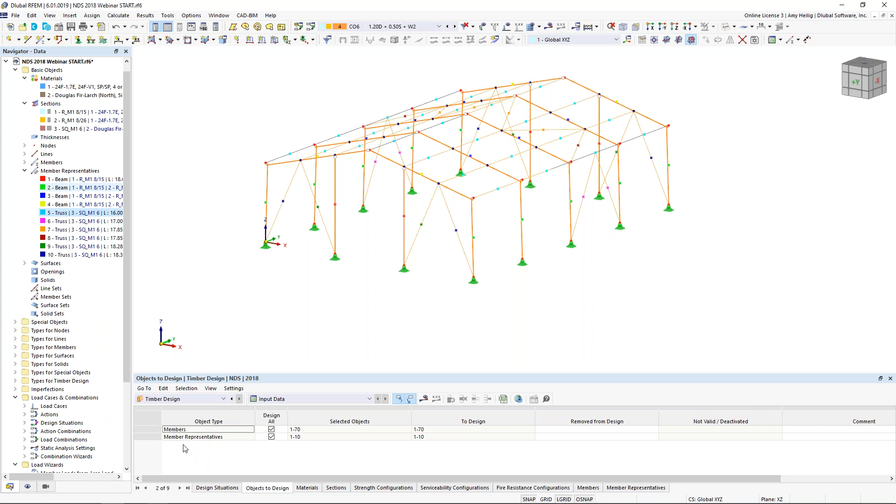So what we'll do is to utilize our table options down here to drop down to timber design. So this is active because remember at the very beginning of the presentation, I've enabled that timber design add-on. And if I take a look at my table settings here and this first tab, design situations, I have my 3 design situations that were generated automatically from the program. We've already reviewed these, my LRFD, ASD, and then I have my serviceability from the IBC. Well, I'm not doing ASD design today, so I'll just simply uncheck that.

Now notice my factored load combinations or my LRFD design situations should be associated here with my strength limit state design. So I can make sure that that is selected appropriately from my drop-down box here. I'm not doing ASD design, so we'll skip over that. And finally, my third design situation here for serviceability should be set according to the serviceability limit state design. Now the program knows which load combinations to refer to for my actual design portion of the calculation.

Now, if we wanted to run fire design, perhaps we go back into that load cases and combinations. We make a copy here of maybe our LRFD design situation, and we can select fire design from our drop-down box here. Under the objects to design, we see members 1 through 70 are automatically selected. All of our member representatives are already selected here. Everything was defined for our design input for each one of those members, so we should be able to design all of them as well.

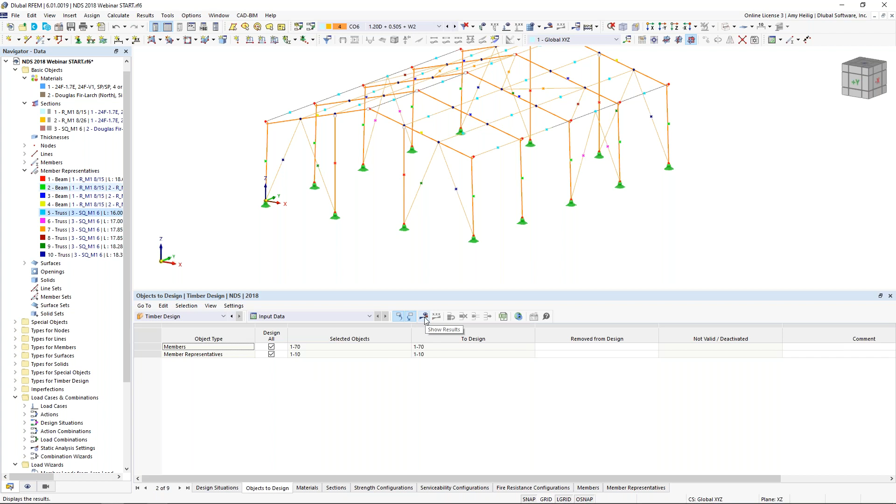I'm now ready to run my calculation, which I can do so directly within this table. So I begin the calculation and the program must inevitably run through all of my various load combinations in order to determine the internal forces, the stresses. You can see that these solve pretty quick now in RFEM 6, and we're now running the timber design add-on according to the NDS standard, and here we are presented with our results.

So I'm now looking still within the table format for my timber design here, but now I have available the design ratios such as for the member representatives. Well, down at the bottom, I can select the design ratios by member representatives here.

As you can see, the program is synced up with the graphical view, so we're showing every check within the NDS. For this group of member representatives, the program will point you to exactly where the controlling internal force or stress is located.

If we're interested in filtering to only the max design ratio, we can take advantage of the filter options up here at the top. Perhaps we choose the option max, and now maybe we're not so overwhelmed, we can just see what's exactly controlling for each member representative.

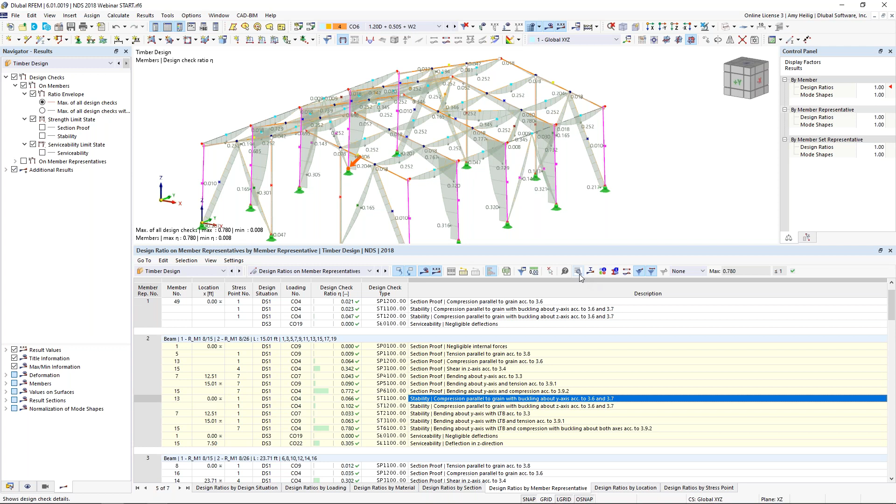Going back to the details here within our design, I want to take a look at one of these checks. We can see the member that we're currently looking at, one of these columns, and stability for compression parallel to the grain.

We've added within RFEM 6 the ability to check out the design check details, and I think this is incredibly powerful because now we are showing you all variables. We are going to show you all of the equations here and also the code references directly to the NDS standard. All this comes into play to determine eventually what is our design ratio here at the bottom.

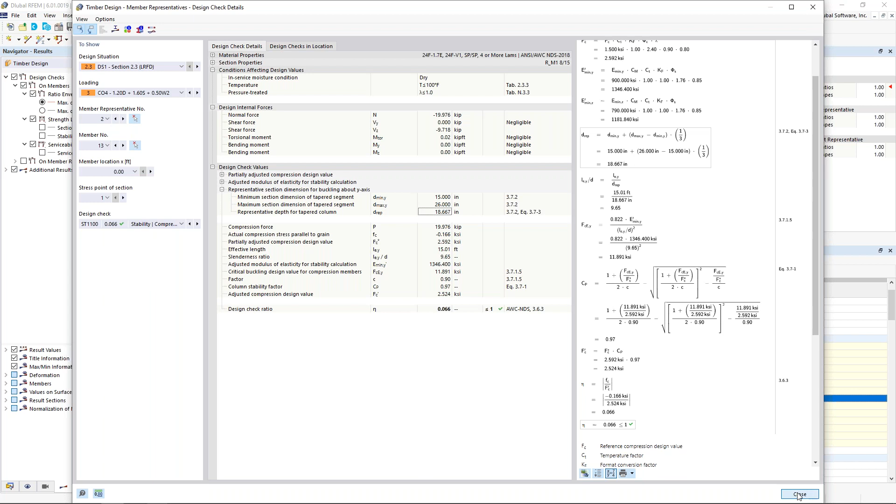Now that we have reviewed all of the timber design, of course there's much more to look at, but for the sake of time, we'll just give you a brief overview for today.

Now I want to back this up a step. Let's take a look at only one of our frame elements here, and maybe we choose the visibility by the selected object, so we don't necessarily have to view the entire structure at once. I'm still looking at my timber design.

Everything's available to me graphically. If we go back into our navigator, we can see within our dropdown we are viewing the timber design results. So perhaps we want to turn off the max design ratio and only turn on the serviceability for this particular frame, or maybe we turn that off and take a look at the stability checks. We can toggle those on and off.

We can add them to our printout report as well. But in addition to the timber design, we also have this drop-down box for the static analysis, which was required to determine those internal forces, the stresses, deflections, and so on.

Notice my table automatically syncs up here to drop me to the static analysis, and my results can be viewed in table format. For example, I'm currently looking at the deformation, but maybe I'm interested in the internal forces of the members, so I can see my axial forces, shear forces, maybe my bending moments.

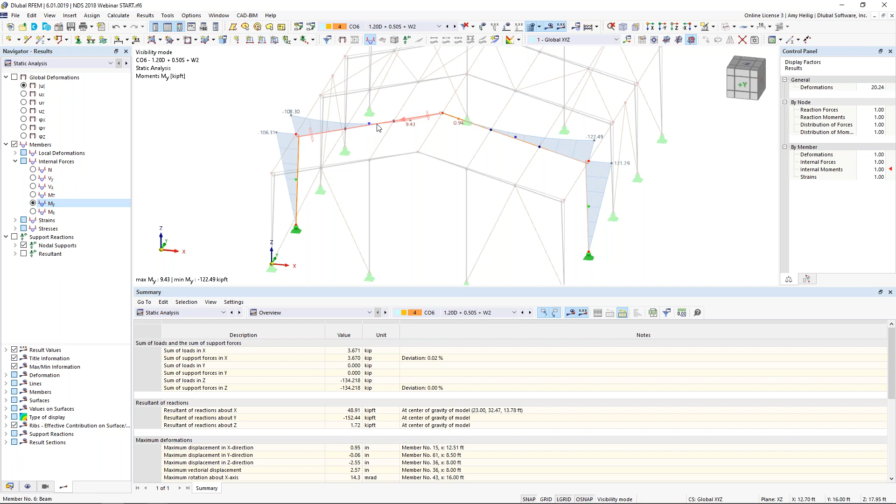For any one of these members, I can right click, and under the members option, I can take a look at my results diagram. The results diagram allows me to turn on and off these various internal forces and deformations. I can view in a bit more detail what's going on along the member length.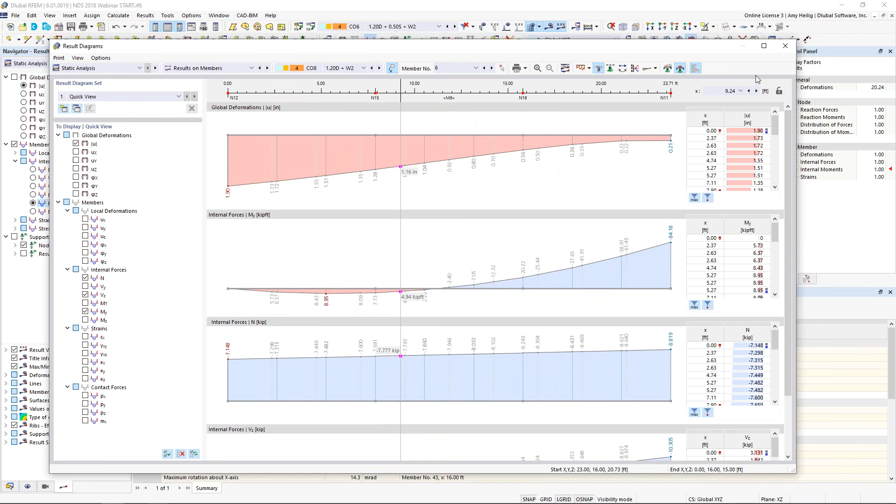I can toggle to different load combinations here. I can add this to my printout report. I also can drag this over to my second monitor and continue working concurrently within the program. So I think it's important to know, again, that both the static analysis and design workflow are working together within RFEM 6, and both of those results are available to us.

That will summarize essentially timber member design for the most part of this entire structure, but I did want to talk about one more new feature, and I think that this is best described with a new model, just so we can simplify a little bit here.

So I'll open up this already saved model, and we can see that we have multiple members drawn here. We have our main girder element spanning in the global y-axis direction. Then I have these additional joist members, and these joists are actually going to be supported by the girder member, so they're technically going to be placed at the top of this member.

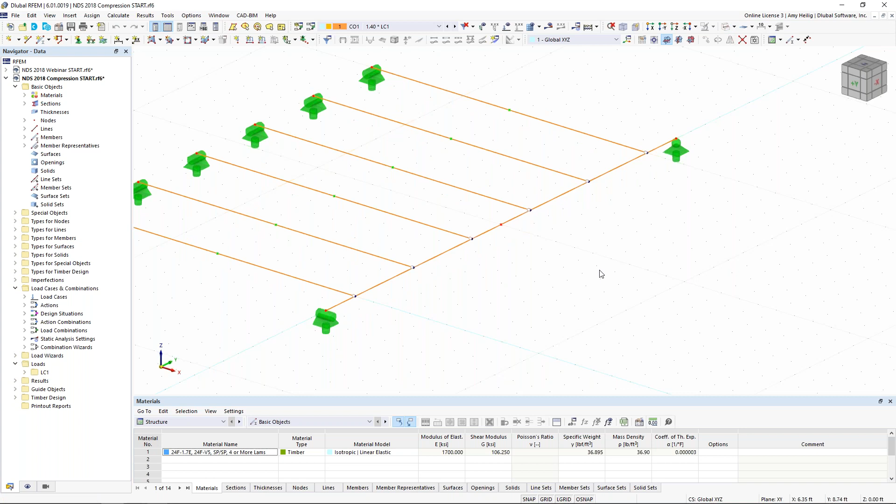When we turn this into wireframe view, we know that with any FEA program, these members are just represented by a single center line. Of course, we can render it just to get a better feel of what dimensions are being used, how these members frame in together. But underneath the hood, this is what's going on.

So if my joists are sitting on top of this girder, sure, I could add in an eccentricity to move these joists up to the top, but sometimes this causes unwanted moments at our member end. So for today's example, we're just going to leave this exactly as it's shown, but just visually know that we want these joists to be framing in at the top of this girder, supported by it.

So what is the entire purpose of this example? Well, now we want to turn to a topic that again is new within RFEM 6, and it is compression design with stresses perpendicular to the grain.

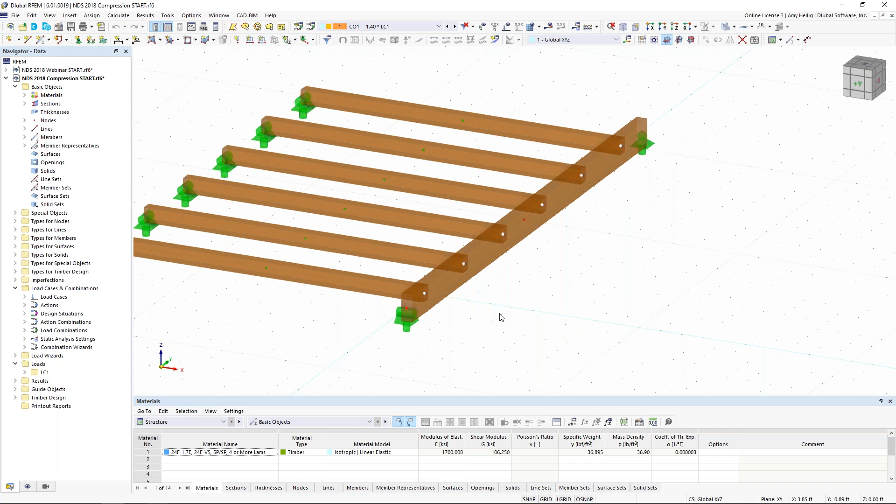So I'm going to highlight all of my joist elements here, and I can double click. Now, again, we could take advantage of our member representatives in order to set these detail settings. Or for my simple example today, I'll just set each one of them individually, so members 1 through 6.

Now we're going to go back to the design support and deflection tab that I mentioned in the last example I was just quickly going over. So what is the importance of this tab other than just simple deflection? I'll go back to the PowerPoint here so we can talk about compression perpendicular to the grain.

Now, similarly, in our example today, not only do we have this situation, but we also have the joist sitting on top of the girder with a force acting downward, but it's still a stress perpendicular to the grain.

Well, previously in RFEM 5, we did not do this check. And the reason is simple, is that the bearing area was not known. If you remember back to the wireframe view, all that we know are these simple line elements framing in together within the FEA analysis. But now within RFEM 6, we have the ability to do this check because we have the new feature under the design supports.

So you want to refer to the NDS section 4.2.6 because it is important here that we consider the reference design compression values perpendicular to the grain depending on the member's material. And the NDS has done some various studies to limit the deformation of these members and materials to 0.04 inches to come up with the design compression value.

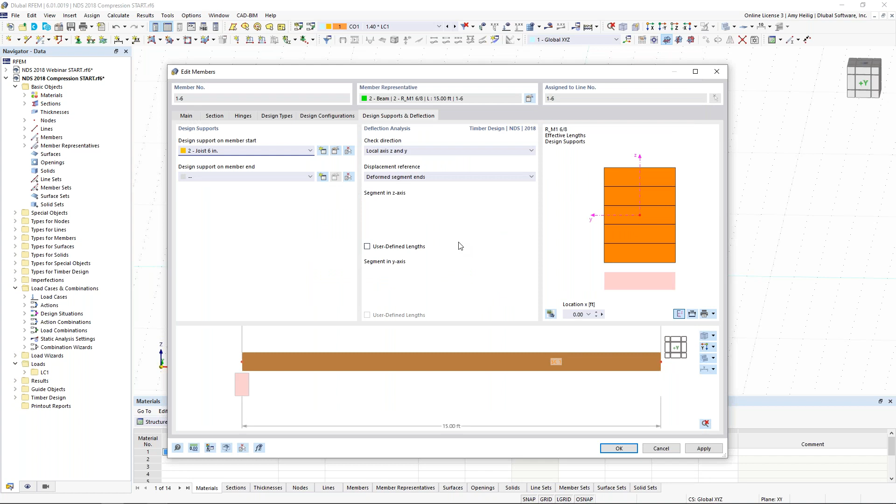I will go ahead and make a copy of this one, and rename it to joist 6 inches, and set the support length to 6 inches. When I click OK, this allows me to define at my member start that 3-inch support, applicable to these supports over on the left. Then for my support on the right-hand side where it's resting on this girder, we want to select the joist 6 inches, and we can see those supports shown here graphically.

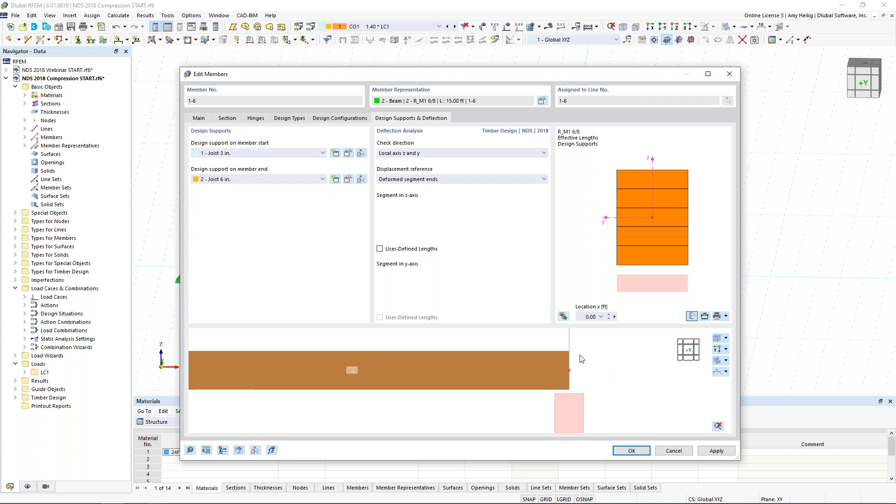Now notice everything is framing in at the center line. If we wanted to, under the main tab, we could activate the end modifications and get an additional tab available to us. The advantage here is that if we wanted to graphically extend the member to the edge of the support, we could do so with a quick click of a button. Now, this does not affect the analysis, the stiffness, or the design whatsoever—it's purely for graphical representation. So maybe it's important that you add this to your printout report and you want to show that the member goes all the way to the end of the design support. But just know that internally, we're treating everything with the center lines.

Okay, so now that we have defined the supports for our joists, we can click OK, and we should graphically see them now at the bottom of our joists here back within the main program.

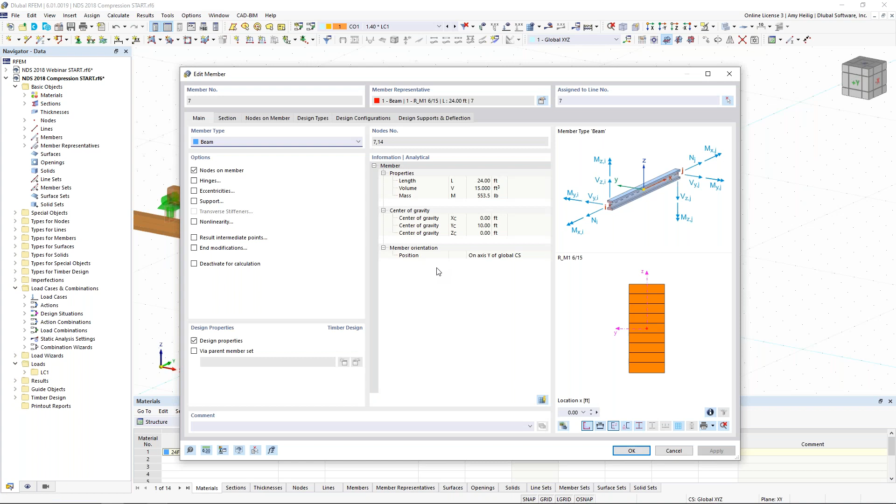Now we want to do the exact same thing for our girder element. I'll jump here to design supports and deflection. I create a new design support definition. This one will be girder, and it will be 5 inches with the support length of 5 inches. This is going to be applied at the member start and the member end.

Now I want to create a copy of this one, and we will call this one girder 6 inches. The difference here, not only is the support length set to 6 inches, but we want to set this on the positive Z-axis of the member, as well as activate the inner support. This is where the joists are going to be bearing down at the top side of the member instead.

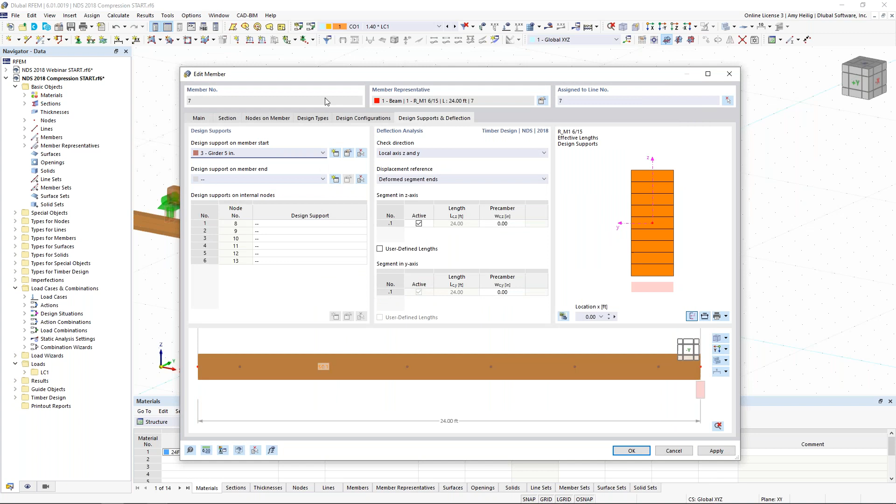So when I click OK, what we can do here is select the girder 5 inches, and this will be applied at the member start and the member end here where we have those nodal supports. Girder 5 inches, girder 5 inches, and then in my interior nodes, which we can see along the member length, we want to select that defined girder 6 inches. If I hit my down arrow key and F7 on the keyboard, the program will automatically copy the cell before it for each one of those settings. And now we get a better visual representation here of those joists sitting on top of the girder.

But we have one small problem here. Notice that this tab is also used for deflection checks, and now the program is automatically assuming that my deflection should be checked with my L/360 ratio between each 4-foot segment, and that's incorrect. We want the member to refer to the full member length for the deflection design. So how do we fix this?

Let's go back into the edit settings here for this last girder 6-inch design support. What I can do is simply uncheck this option down at the bottom to consider the support in the deflection design. Alternatively, if we do want to consider the support for the deflection design, but don't want to check compression, we can activate this and uncheck the direct support instead. So if we don't want to have those compression checks according to the NDS, just go ahead and uncheck the direct support. But in this situation, we just don't want it to be considered for deflection design. Notice our table updates automatically here to the full member length of 24 feet.

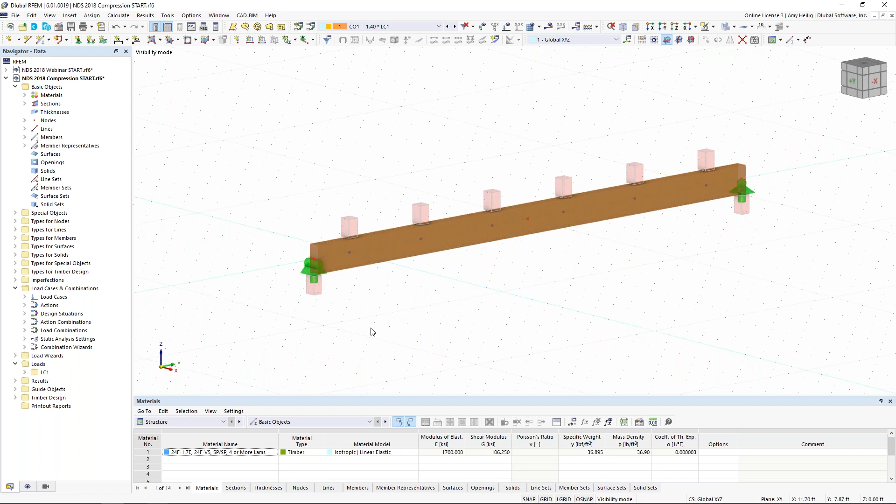I click OK, and now we can see these design supports shown along the girder. If I want, I can select this element and view the visibility by the selected objects, right-click to hide the objects in the background. This gives us a better representation visually of those joists sitting along the member, as well as our supports.

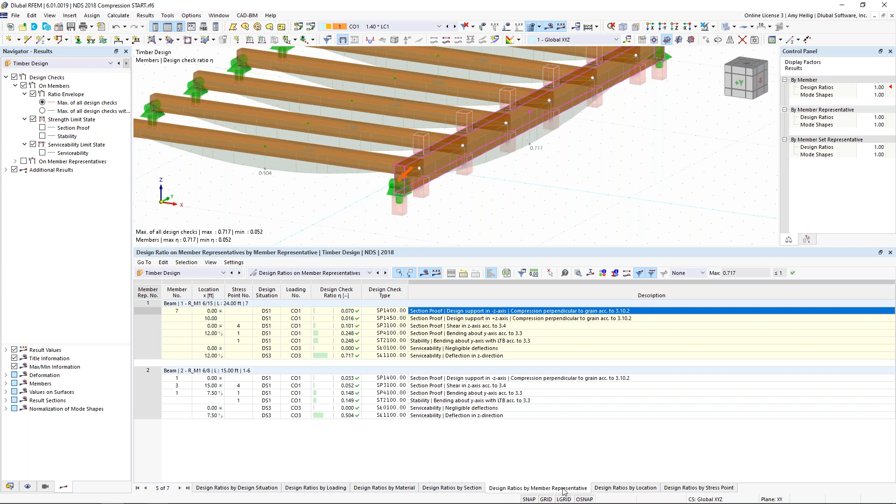Now that we have defined these design supports, let's quickly run the calculation in the timber design. I only want to point out what the design calculation details look like for this new check within RFEM 6. So I'm looking at design ratios by member representatives tab down at the bottom, and currently we're looking at the compression perpendicular to the grain according to 3.10.2. This is that new check here.

Before we look at the details of this particular check, let's back up a step to go to the static analysis. This shows me here my support reaction for the static analysis at this particular location, and we can see that is 2.35 kips. If I toggle back to my timber design and take a look at my compression perpendicular to the grain at this location, and go into my design check details, sure enough, the compression force perpendicular to the grain that the member must resist is that 2.35 kips for my support reaction.

We look at the additional details here. We can see the bearing length of the design support is set at 5 inches. If you remember, I had manually input that in with the design support. The program multiplies that by the member width, the 6 inches, ultimately to get the bearing area here of 0.21 square feet. So now we can run this calculation check for the compression perpendicular to the grain to get our design ratio of 0.07. Again, this is new within RFEM 6, and it's only available when you define those design supports.

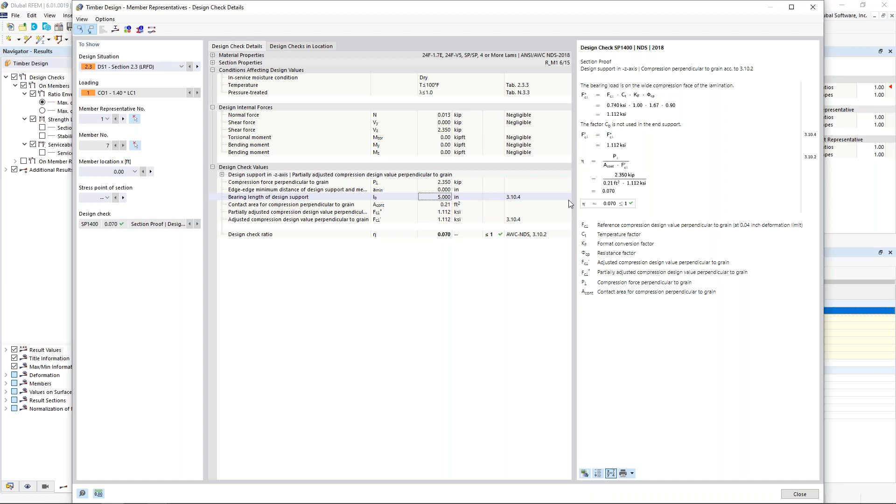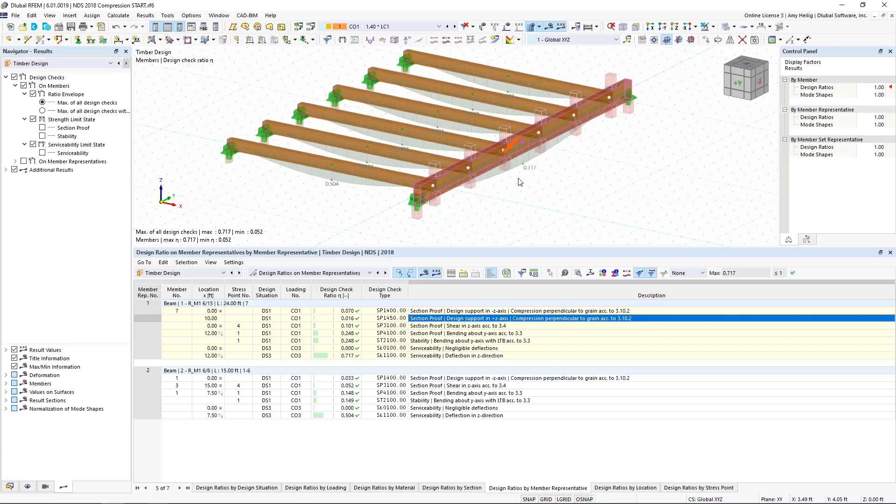If we take a look just a little further down the member here, we're also going to see compression perpendicular to grain, but this time for the positive z-axis. This is those joists framing down at the top of the member. So we'll go ahead and check that similar check here, but rather at the internal point of the member. All right, so that will wrap up our examples today, and we'll go ahead and conclude today's webinar.